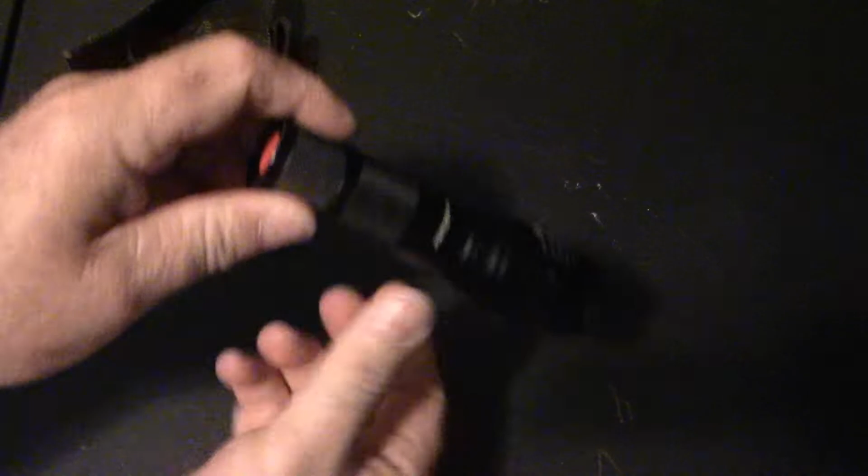Welcome back, everybody. This is part 2 of the practical 3D design using FreeCAD. As you remember last time, I did a quick video for this flashlight, and all we did was create a jacket or shell for the 18650 cell so that it would fit in this flashlight and not rattle around.

So what we're going to continue to do today is design a case that we can recharge those 18650 cells in. As I mentioned in the first video, I can get these rechargeable batteries from the dollar store. As you can see here, they are $4, 1800 milliamp hours, and that's what we use to get our 18650 cells from.

And what we're going to end up doing is building something like this. This is just a first revision with some errors, so we're going to start from scratch and basically redesign this. The idea is that we can open it up and put an 18650 cell in there to recharge, and we're going to use the electronics and everything from this cell.

So first what I'm going to do is go over to my desktop and we will start up our FreeCAD so that we have a place to put in our numbers and things, and at the same time we're going to open this up.

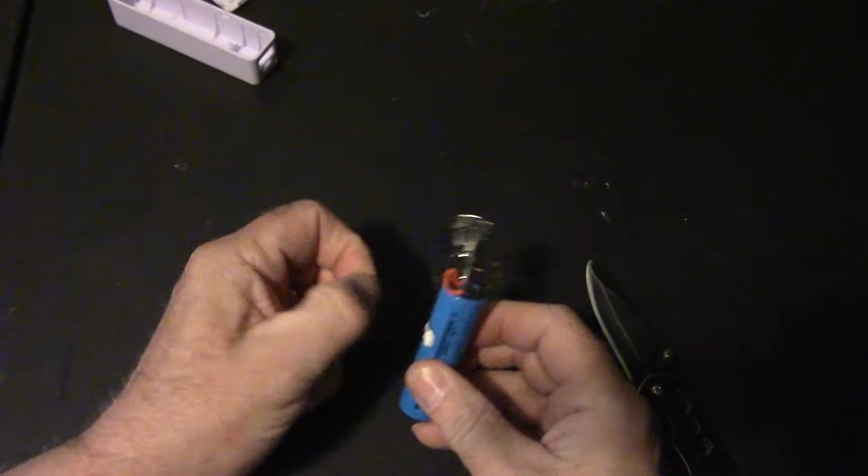And we don't need these pieces anymore. So there is our 18650 cell. Take that goop off, that's just going to interfere with us later. Careful not to breach the cell.

Alright, so we have an 18650 cell, some wires. You can see it's got a tab soldered on each end, one there and one there for the wires to go on, and this little charging board.

So what we want to do is basically take this charging board and add it into a spot like that at the top. And then we need to have some way of contacting the ends of the cell. So what I'm thinking of is probably a folded piece of metal.

Here's a concept of a folded piece of metal, and that will fit down in this slot here and reach out here. And also one will be in here and reach out, so that when I put the cell in, they will contact the ends.

And then we'll design it so that you can close this up. The cell will be secure inside, and you can plug it into a charger. Basically, it'll be the same thing as this power bank, except that we can take the cell in and out.

And if you look at the sizes here, you can see that our case is only longer than this by the ends where we're going to put our pieces of metal for recharging. Other dimensions are pretty much the same, except for the hinge that's going to stick out here.

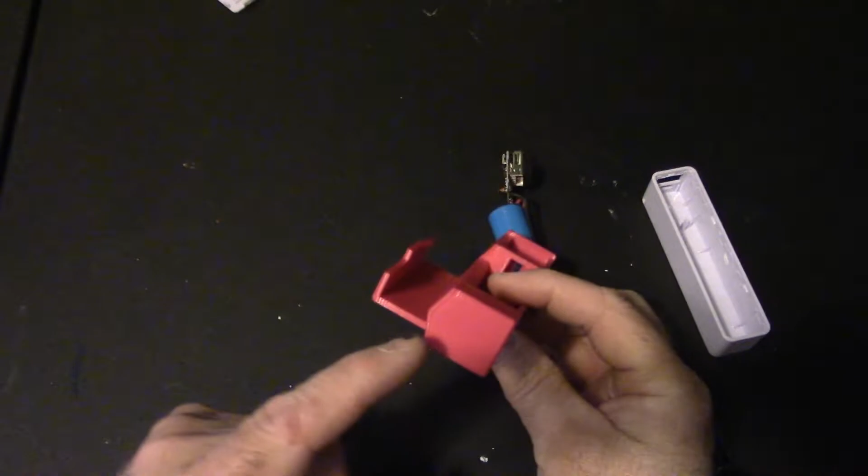Okay, so a little word about hinges. In order to have a hinge that opens up all the way, your axis of rotation of the hinge has to be outside of the edge of the box. So for it to come out here, to the edge of where our box is, you have to have the hinge rotation outside of the box. Otherwise, it'll bind up on its own self and only open up 90 degrees.

Now we could build it to open up 90 degrees like that, but I thought it might be a little harder to get cells in and out, so we're going to design it to open up 180 degrees. You may also notice that this hinge is very tight, with no seams. This is very thick and robust, so you're not going to be able to put this together and print it in two pieces. This is actually designed to print in place. You can see there that it was printed open, and there was just a little bit of touching there.

Print in place like that, and then open it up, and it works. So this is going to be a print in place moving hinge designed to fit the 18650 cell and that circuit board plus the two pieces of metal we need.

Let's go over to FreeCAD, and we'll see here we have it open. We're going to go down first to the spreadsheet and create a new spreadsheet. Oh wait, we need to create a new document first. There's our new document. Now we can create our spreadsheet, and then we're going to go down to part design because that's where we're going to work later. Okay, so we're going to leave that like that.

We're going to go into the spreadsheet. So, like we said before, the two default values that I use all the time are based on my printer and the materials that I use and how I print things. One is what I call material thickness. This is a wall thickness, or the thickness of plastic, which I've used here. You can see here, that's this thickness here, which is very robust.

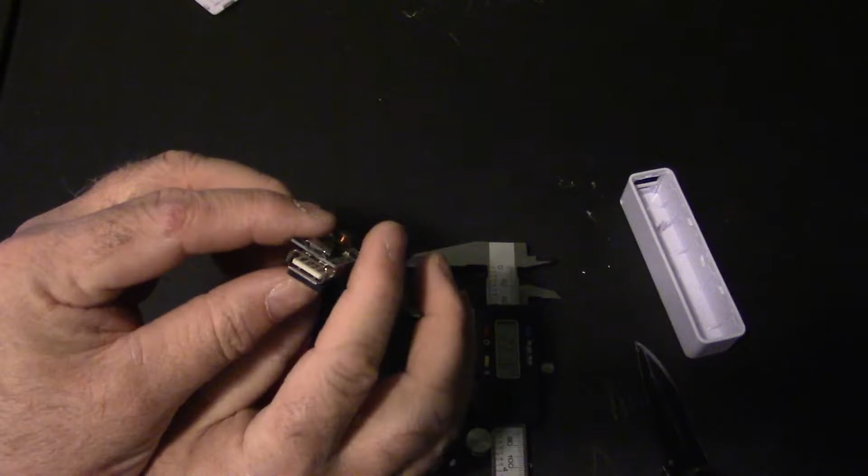That's the board length. Alright, so the only other things we need to think about now is how we're going to put power into this cell. There are two things, right? We don't really care about getting power out, so we do need to leave space for that. But we need to get power in.

Now, if we put our plastic right up to the end here, and just make a hole big enough for just the end of the cable, it's never going to connect, because we're going to have it sitting back this way, 2.4 millimeters. So what we need to do is make sure we have a big enough opening here. I'm not really caring about waterproofing or anything else, so I'm actually going to make the hole a lot bigger than we need.

So right now, on this side, it's about 4 millimeters high, and it's 7.5 wide. But I also need one for the USB-A. And look at that one, it's 13.25, so I say call it 14. So we make an opening that's 14 wide all the way down. That should work. So we'll go back to FreeCAD.

USB width 14 millimeters, and then we need the height. Now you notice that the board has one above and one below, and when we design our charger, you can see here it's designed to kind of sit in the middle. So if we make ours sit in the middle, so the board height is there, that should give us enough room for the top part.

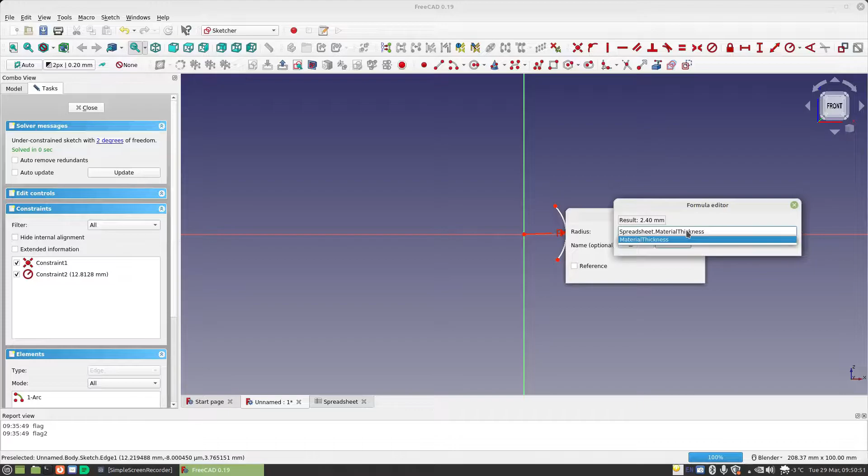Okay, so this is now the edge of our hinge. Okay, now we need a line going up to the top of the box and a line going down to the bottom of the box. And then we need some nice rounded corners. Now we could use fillets later, but fillets sometimes add extra troubles. So we're just going to use another arc, one here and one here. And those are our nice rounded corners.

And we need a top of the box and a bottom of the box. Oh, and you can see that these 2 did not meet up, so we're going to make sure that we connect that. Again, we're going to do our own manual filleting. One here, and then a line to connect them. There we go. So there's the basic outline of our box.

But now we need to do some figuring of what we need for heights and things. So this one, and this one, and this one, and this one. These 4 corners, we're going to make them all the same with the equals up here. And now the radius of them, because we're using a material thickness, we're going to actually want to radius it to the same thing. So we'll pick this one up here, and we're going to set its radius to the material thickness again. Okay, now if we change our material thickness, all of our corners will look nice still.

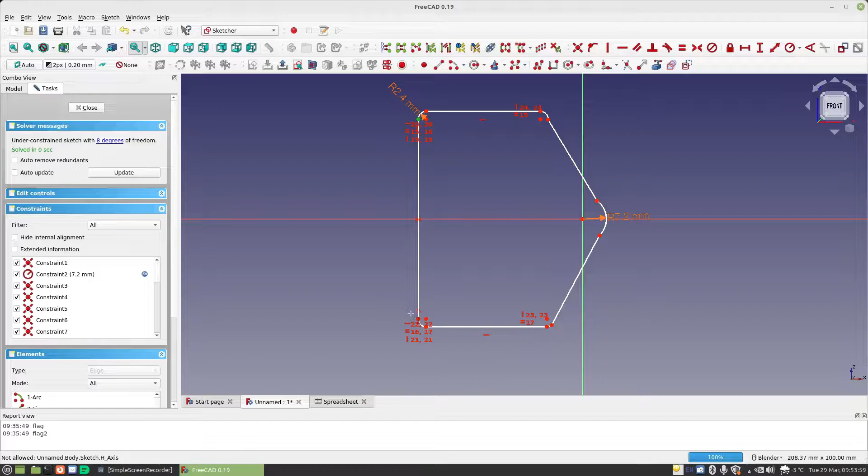In order to fit the 18650 cell in this box, the space between the outer walls has to be the diameter of the cell. So we'll go in here and set this to Spreadsheet, cell diameter. Alright, so now an 18650 cell will fit in here, and then, because the radius is material thickness, we have material thickness up here and material thickness down here. So that fits our cell inside there. We're going to do the same thing down here. We're going to grab that point and this point, and we'll set it the same.

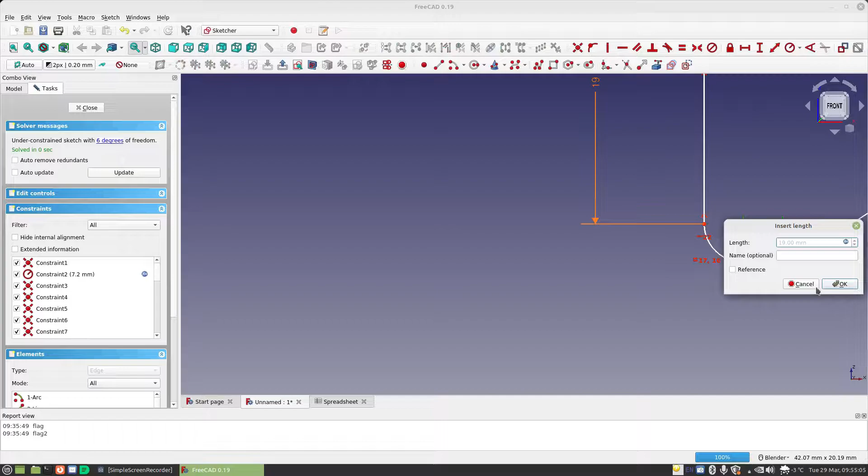Alright, so now we have our 18650 cell. It should fit in there. Oh, you know what? I made that material thickness without thinking. We have to make this the cell diameter. There we go. Now you can see that this has moved all over the place crazily. That's fine. And these here did not move together, so let's take this one and make them the same. Alright, so now we have our main box here. We don't have our hinge and we don't have an offset.

Let's make these look a little nicer. If I take this line and this line and use this constraint here, the tangent, we'll get a little constraint substitution, and now you'll see that this, when it comes along, echoes this curve. So this is a tangent now to this circle. We're going to do the same with this one. Make it tangent, and we'll do the same here. Make this one and this one tangent, and this one and this one tangent. Okay, so now we have a nice hinge design, and they move the way we want them to.

But remember we said we need our hinge axis point to be outside of our box. So the only way we can do that is by setting the distance from this inside point, because these points here can move, from this inside point to the hinge point has to be the same as the material thickness. So I set this and this to Spreadsheet material thickness.

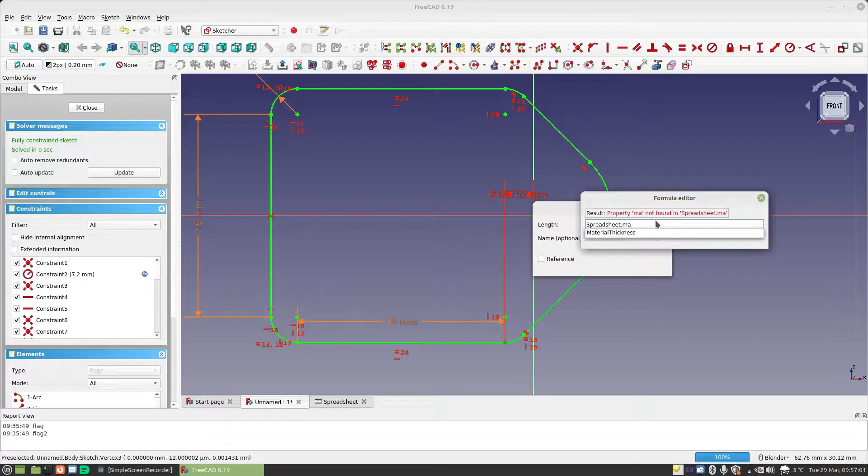There we go. Now our hinge center is just outside the wall. It's actually touching it right on the edge, which is like perfection for how it's going to work. We'll have to take care of making sure that we don't have any interference by using our standard gap with the lid. But you'll see why I put it this way shortly.

Okay, I think I did this wrong here. I think this should actually be diameter. Yeah, let's change this. Let's make this the diameter, because that looks really large. Spreadsheet dot material thickness times 3. Yeah, that looks much better. That looks closer to what we have here in this design. Because we had 14 millimeters, and that didn't look right for that size. This here looks closer. Yeah. Much better.

Alright, so there's our fully constrained sketch. So how are we going to make it long enough to fit everything we need? So we're going to use the pad. We're going to change it to 2 dimensions. And the reason we're doing 2 dimensions is because the 18650 cell here, you see, is not centered. But our second drawing, we want to be able to easily center this in here so that they line up. So in order to get the right dimensions, we're going to start from the center here, and one dimension is going to be this way, so you're going to have half the cell length plus the material thickness plus a gap area here plus the material thickness again.

Alright, now we can go back into our drawing and into our pad. So one dimension is going to be our cell length divided by 2 plus our tab length. So that gives us half the cell in the inside space, and then we need the material thickness times 2. So that gives us the one side.

Now on the other side, we want the cell length divided by 2 plus the tab length plus the board length. So we have the board length, the tab length, and half the cell, but we have 1, 2, 3 of the material distance. So we're going to use spreadsheet material thickness times 3. And there is our basic cell case.

Alright, so now we have a solid object that will not fit anything in it. It's just a solid tube of plastic. So now we need to add in openings for the different things, for the cell and everything else. So we can go over here to the left side and create a new sketch. Okay, and I don't know why FreeCAD does this. Rotates things, just does it. I don't understand why. But because it has done it, we're going to work with that.

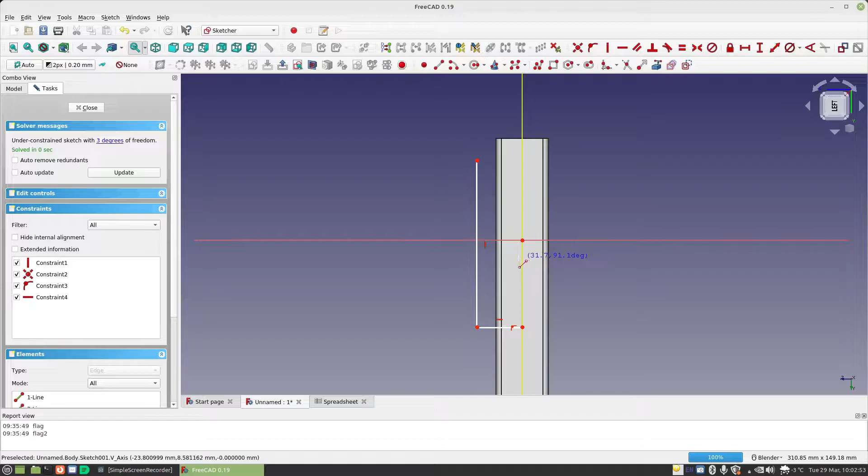This is going to be a problem. See, if I make these horizontal, then FreeCAD has a problem with redundant constraints. So some of these we're going to make a little crooked, and that's okay. Alright, so now I can take this and that and say a touch. Take this and that and say a touch. And make this one horizontal.

And this one is not vertical, but at the same time we also want it centered. So because it's not vertical, we're not going to have any problems. We can click there, and center it. Then if I make these equal, then this becomes centered.

Okay, so now we have 3 degrees of freedom. So for this hole here, that's so we can reach down around the cell. Right now the box is set up so that the cell is centered in it, and you can't reach and put your finger underneath of it. So we're going to make the height of this thumb hole, so we can reach under the cell, 1/4 of the cell diameter. So if we go spreadsheet.cell diameter /4, that'll give us a hole that's big enough this way.

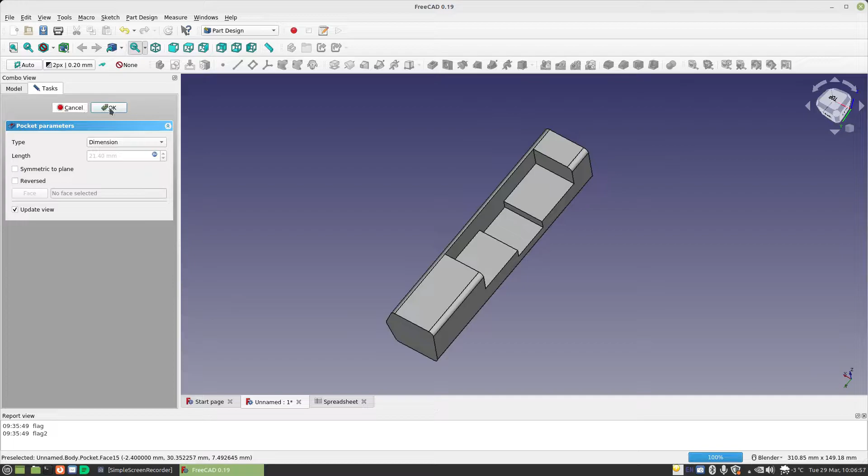Actually, you know what? Let's redo that. Let's go back into our sketch, and we're going to delete these. And we're going to delete that constraint, and we're going to take this guy and this guy and make them the same. And we'll take that horizontal constraint off, and we'll say this one, this one, this one, and center. There. That works better. Alright, so now we've got our sketch there for the cell opening. We'll make a pocket, and we'll make it through all. Okay, so there is our opening for the cell that way.

Now we need a spot to put the circuit board in. We also want to be able to put a cover on it. So one of the things that I like to do for putting covers in is make a dovetail joint. So we're going to put a sketch here. And we'll just draw this in quickly. So just to show you what I mean, a dovetail joint is like that. Okay? So that way if I cut a hole like that in here, then I can make a cover of this shape and slide it in.

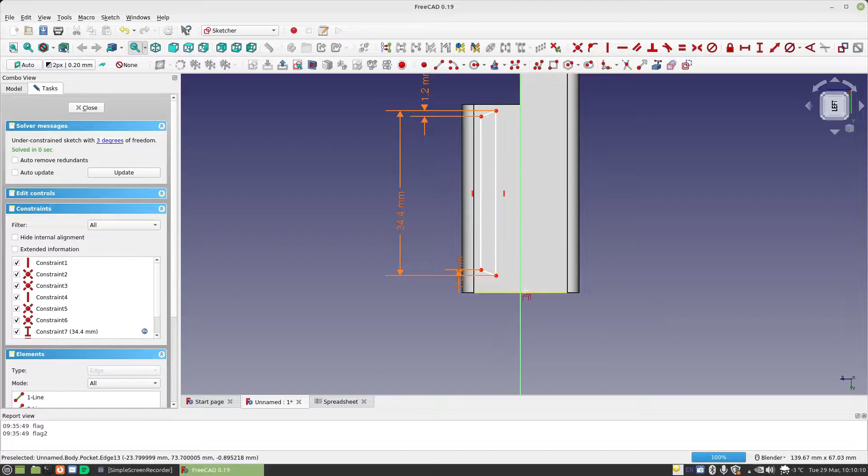Okay, so now where do we need that to go? We need it to be lined up with this edge here and also be centered in here. So the way we do that is we grab this one right here. This is our reference. We're going to reference this outside edge. And if I say that this piece, I better be careful. Before I do that, we better set a thickness here. Otherwise we're going to cause ourselves some trouble. So this, between these 2 points, is the material thickness.

Alright, there. Now when we move this around, see, if I hadn't set this distance, this piece could move past this one, but now if this piece moves, they all move together. Alright, so now we're going to say that this point and this point have a vertical constraint, so that puts us the right distance up this way.

And now we need this to be a certain distance here, and that's going to be a material thickness again. You can see how we keep using material thickness as a reference, and that's why we set it, so that we can continue to work with it all the time, and then if we change our material thickness for a different printer or something, it will update all through the whole drawing. See, now we have a fully constrained sketch, and we're going to put this one also through all. Alright, so there are our 2 top openings.

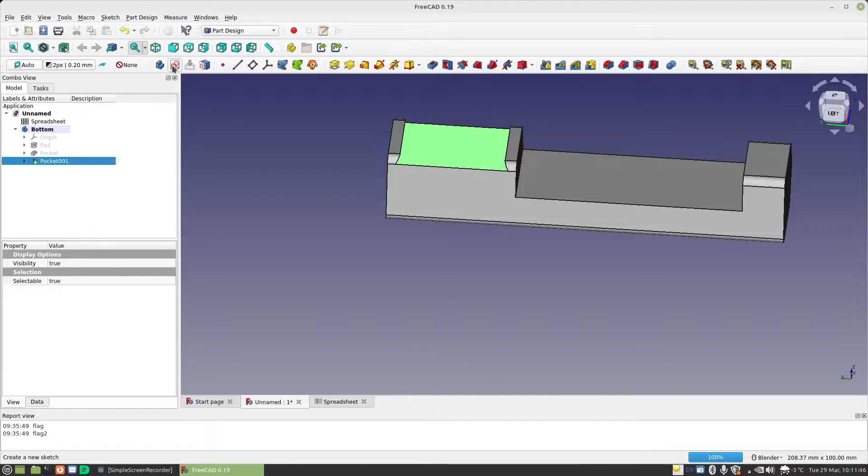Alright, so next what we need to do is make an opening here for the board, and an opening here for the tab. So we select the top, and we create a sketch. So we just need a box here, and a box here. Alright, so first thing we're going to do is say that these 2 here have a vertical constraint, that way they're at the same spot. And if we say that these 2 here are the same, then they line up over here.

This one is going to be a board length. Okay. And then we need the material thickness space between these 2. And we'll put that measure on this side just for the fun of it. And then this one is going to be a tab length.

Okay, so now we have 3 degrees of freedom. Why do we have 3 degrees of freedom? Well, we can move this in and out, and then we can place this in any place we want. Alright, so the width is obviously going to be the cell again. Alright, so now all we have to do is place this somewhere in our drawing.

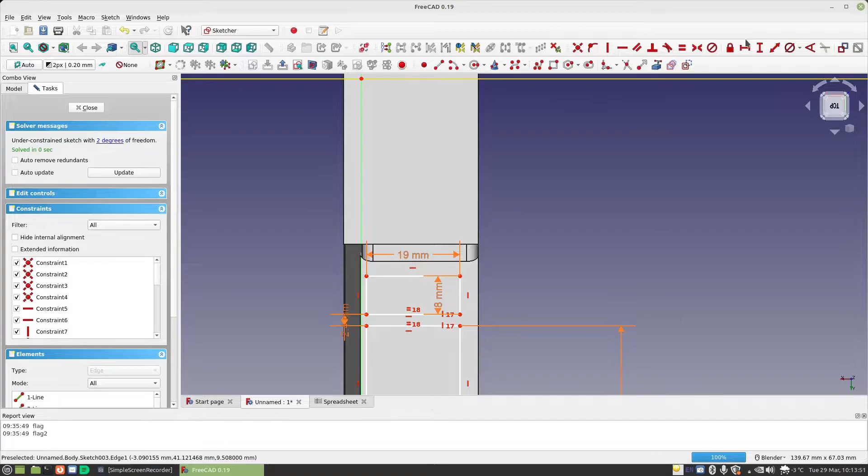Okay. So rather than using a reference point, what we're going to do is use the center axis again. And the way we set this up was that this is the outside edge, so then there's a material thickness, the opening, and then material thickness. So if we set the horizontal distance between there and there to a material thickness, now it's centered. Now all we need to do is put this in the right spot vertically.

And remember we made a dovetail, so if we use this, our opening wouldn't be in the right spot. Matter of fact, if I move up, you'll see that it's outside. We actually are going to end up with it here in between, because it's going to be centered underneath. I'm going to bring it up so we can see this point. And the distance between here and here is going to be the cell length divided by 2 plus material thickness. And there we go. Centered where it needs to be.

Okay, fully constrained. Now, if we make a pocket and we set that to the cell diameter, you can see it goes in, but it's left us a wall on the bottom of a material thickness. Okay?

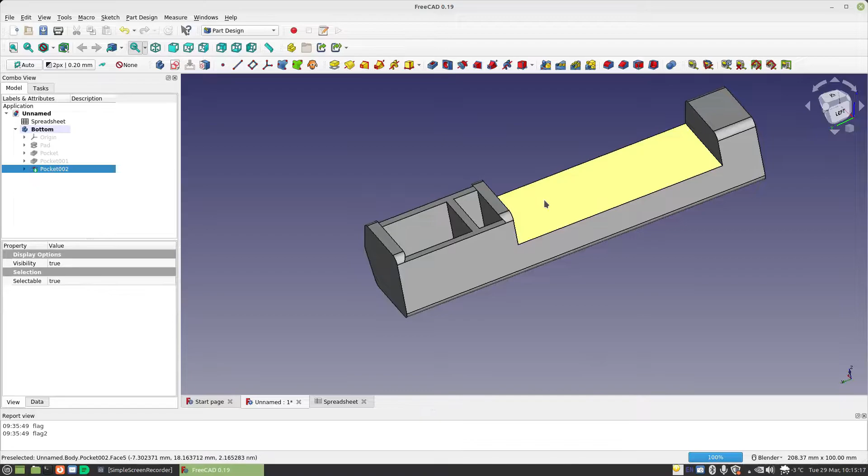So the next thing we need to do is make a space here for our cell to fit into. That one should be pretty easy. We'll create a new sketch. We just need a box. And we're going to take off that constraint because it will interfere with this next one. So like I said before, we have this centered, so we'll just center that and say that this is the cell length. Nicely fits up.

Okay, and then this is obviously the cell diameter. And now we need the spacing here, and like I said before, here's our material thickness. So now we're going to make a pocket. Now because this is only half the size, this is the cell diameter divided by 2. Alright, there's a nice little hole in there.

Okay, so the only things we have left now is we need to make it so that the hinge fits in here, and we need our holes for our hinges. So if you look at the example I made, you can see that I have a hole here for the tab to fit in, but also a hole down here for the wire, and I have the same thing here. And basically all I did is create a sketch on this face and push it through both ways. So that's what we're going to do again.

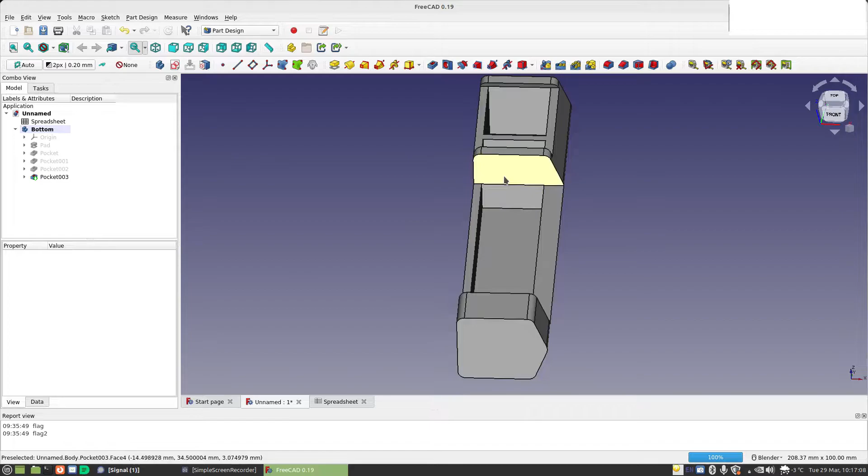So we'll come over to this face here and we'll create a sketch. And you notice we cannot see because it's behind this. So I can just rotate this up. So we made a line. I'm actually allowing FreeCAD to create the horizontal constraints for me.

There. Alright, so we didn't get some of our constraints. Let's make this vertical and make this horizontal. Alright, so just for fun, because we already have a tab length, we're just going to make this the same. Spreadsheet dot tab length is also going to be our width. Okay, so that gives us an 8mm hole to put our tab in.

And let's make this wire hole here. We'll make it a material thickness, because that's a fairly large section. And let's take this one and this one and make them the same. So now we have a box sticking out the side. That is a square box here. That's a material thickness. Alright, so we have 3 degrees of freedom. 2 of those degrees are where we place this. The other one is the height. And because we're putting it in the box, we're going to make it the cell diameter again.

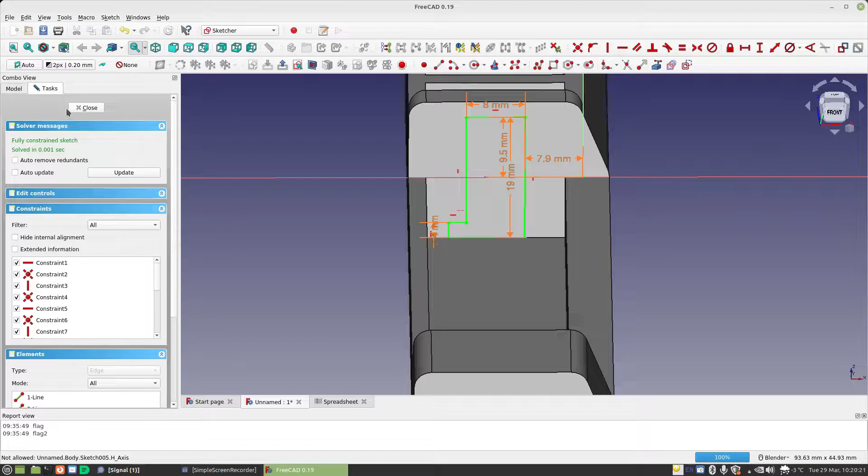So if we look at that, now you see that this looks centered, and it should be. So the only degree of freedom now is centering this way. And because this is a cell diameter and height, and we have this centered on that, if we make this distance here the cell diameter divided by 2, that just touches the bottom, and there's our 2.4 material thickness on top. So there's our fully constrained piece. And we hit close.

Alright, so now we need to make a hole. So we make a pocket. We're going to go 2 dimensions. So this first one here only has to go through that wall, so it only needs to be the material thickness. Okay, so that's this side. Now you notice this one goes right through. So in order to get from this face to that face, we need the cell length. To go from that face through that first wall, we need the material thickness. And then to go from that wall through where we're going to put the tab, we need the tab length. We hit OK, and now you can't see it, but if you look in here, you can see we have a nice space. Alright, there's all of those pieces.

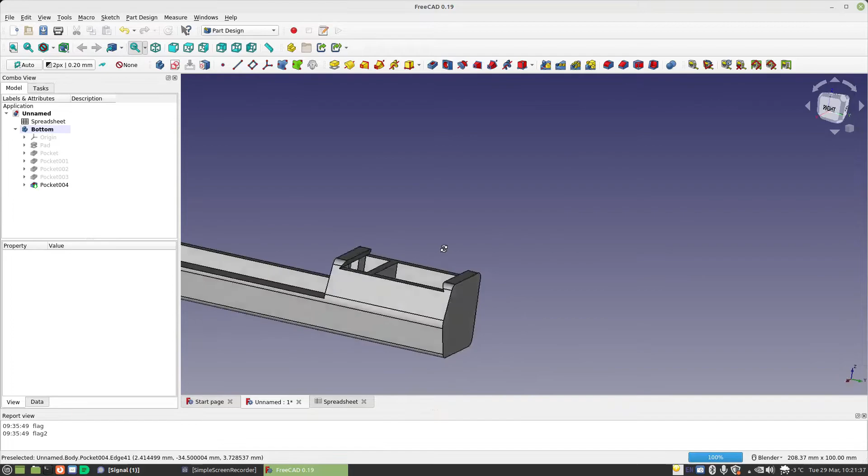So the only piece left to do now is to make a space for our hinge here. Now this one gets a little tricky. Okay? So let's flip this around so we're looking at the front. In order to get this to work, instead of drawing on a face, we're going to create a new sketch, and we're going to use the XZ plane. And hit OK. What I'm going to do is close this, and hide this. We're going to go into our sketch. So we had it curved this way, so we need an opening going this way for where the other box is going to be.

So we'll start with our arc like we did last time. And there's going to be a line going down like that, and our little curve at the bottom. And then, because we're just cutting a hole, we're going to make a line up like that. So this to there is vertical. And this is going to represent our outside edge. So first, the diameter of this that we set last time is the material thickness times 3, which is very small compared to what we were doing. And then we set the radius down here to the material thickness. Right.

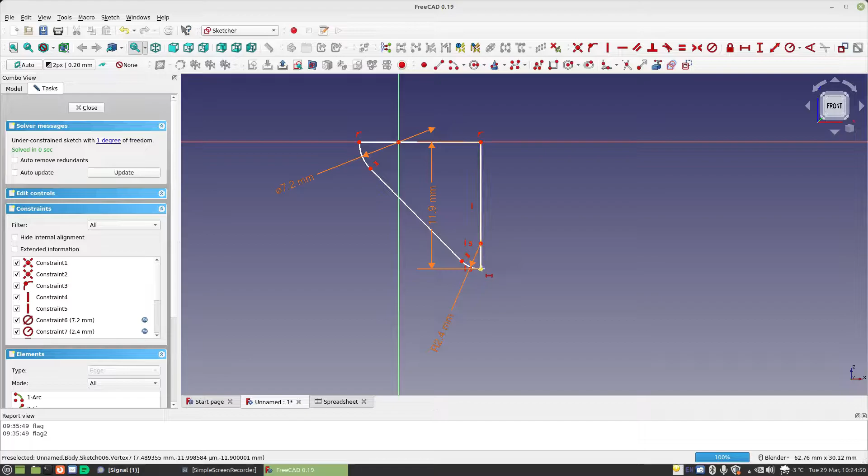Okay, so we only have 1 degree of freedom, which is this distance here. So from the center of the hinge to that point is a material thickness.

Like that. So this cutout should give us a cutout for the other hinge, the other door. There's a problem though. We don't have any gap in this. So what will happen is that when we print this, they will stick together. So in order to get the gap, first thing we need to do is we need to change this. This diameter, we have to add the gap to it.

Like that. So that makes that slightly larger, which also means we need to move this a little smaller this way. Okay, so we're going to subtract the standard gap this way. And now we have a slightly bigger opening here that we're going to make.

So we'll go back in and we will show this. You can see that this is going to cut out in here. Okay, now I do see a problem here. Why is my circle in here? My circle is in here because I did the wrong math here. That's the problem.

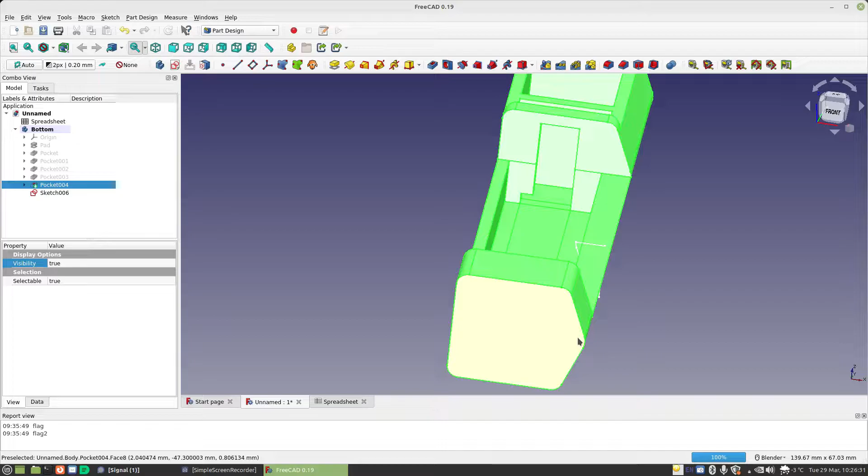So we're going to have to fix that math. Because this circle edge should be touching here. Otherwise we end up with our other hinge coming into our space. Okay, so we're going to leave that and go all the way back to our original sketch. You can see here that this spacing here is only 2.4, but this diameter is 7.2. Half of 7.2 is 3.6.

So this should be at least 3.6 away, and it's not. Okay, so we need to move that away. So let's go back in here and we do spreadsheet dot material thickness times 1.5. There, that gives us a bigger thing, and you'll see here that this now is outside. Okay?

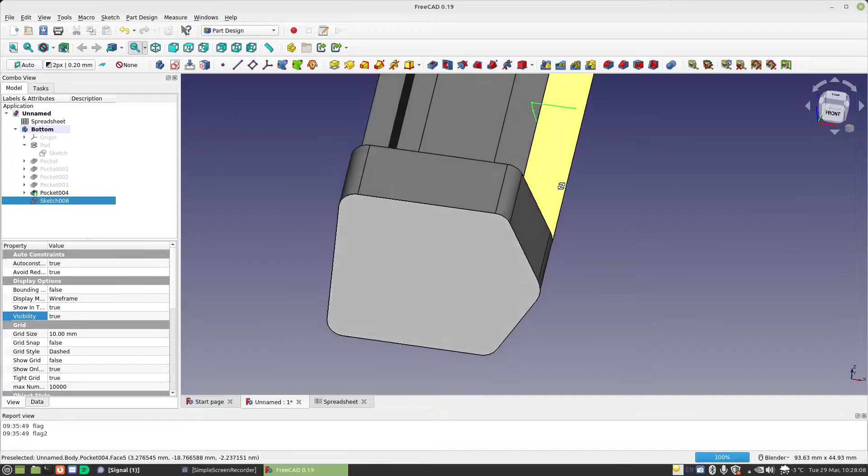Close, and all of these should get changed now. We'll just go down through, make sure they recalculate. Now if we look here, you see this is too big now, right? This is wider than our 2.4. So this one we did right. So this sketch here, no, that one's fine.

Okay, so this ends up being too big, right? Because we only made this 2.4 from the center. This has to be times 1.5. And that moves it over here. That's better. And we'll go into this one and do the same thing.

Same thing here. There. And everything nicely lines up. So now you can see that this is just inside there. We have a little bit more space. That's our gap. And we need to cut that space out.

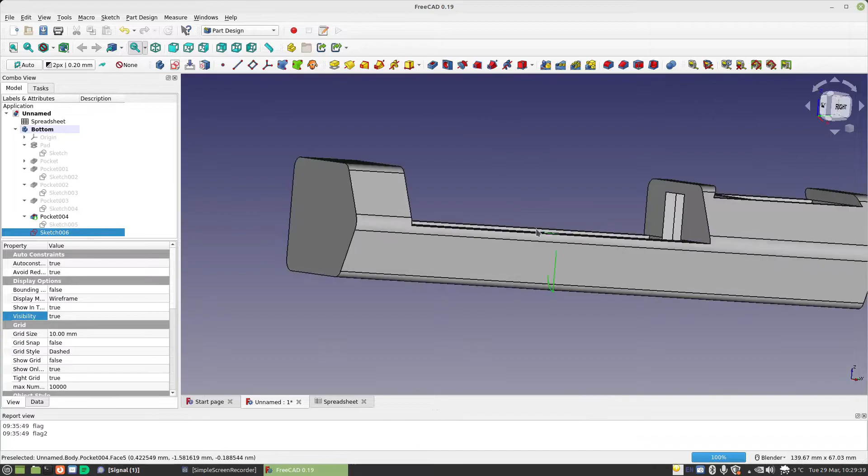So again, we're going to use 2 dimensions, and this is going to be the cell length divided by 2. Takes us right to the edge. And you can see that I have neglected to put it wide enough here, so we'll fix that. And we go here to cell length divided by 2. Okay, so we obviously need this a little wider so we have more space.

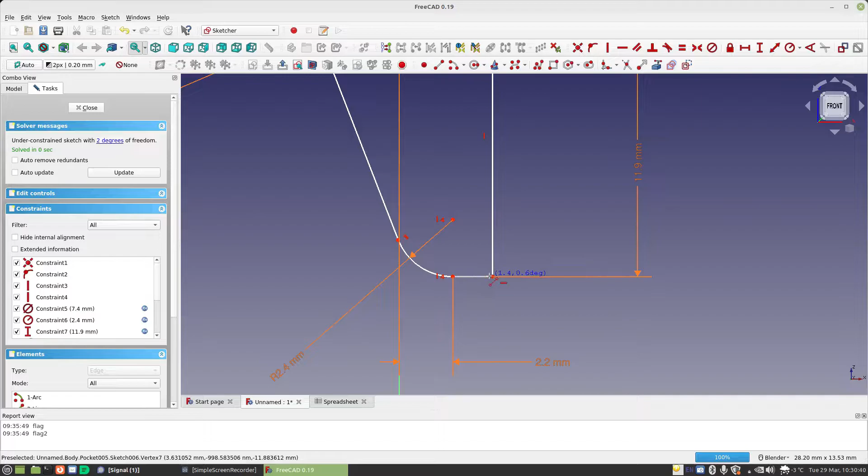Okay, so we'll go back into our sketch. And we're going to go to this point here and hit delete, and that will delete the constraint. Now I can move this away. Right, and what we're going to do is add a line between these two, and we should make that line to be material thickness. There. So you can see we made it wider, make it close, and there we go. We have a nice spot there for our hinge cover to go in.

Alright, not quite done yet. We need an opening here for our hinge to fit in. Alright, so we're going to create a sketch on this face. And we'll move it down so you can see, and you notice our nice little point there. Now we don't have to do any measuring from curves or anything because we got a nice point.

And we need an opening. And its radius, its diameter, sorry, is the material thickness times 2. Alright, so there we have a nice round opening. Because that's its diameter, close, and we're going to give it a depth of also the same thing.

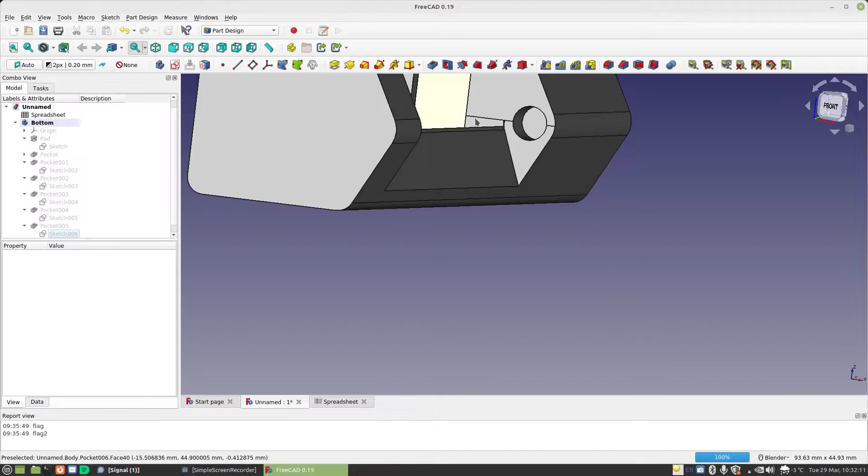And the reason we do that is because that is basically the square equivalent of a square hole, but because we did it here, I can fillet this. And if I add a fillet, you can see it starts to round out. We can do this at a material thickness, but because of the way FreeCAD works, this will not render as a fillet because they're exact. There's something to do with the way FreeCAD does math.

But if I do a subtract of 0.001 millimeters, it still shows up here, and it will actually show the fillet. And obviously I did that wrong. This depth has to be half that. This should only be a material thickness deep because we want it half of a circle.

There, now you can see that that is half of a hole. And when we make our other one, we will add it in there.

Now, again, because this is the opening, we should make it a little bit bigger so that it fits the socket. So we come in here and add plus the standard gap, and that will make it a slightly bigger hole. You can see that has left a little space there, so we can actually add that in here as well.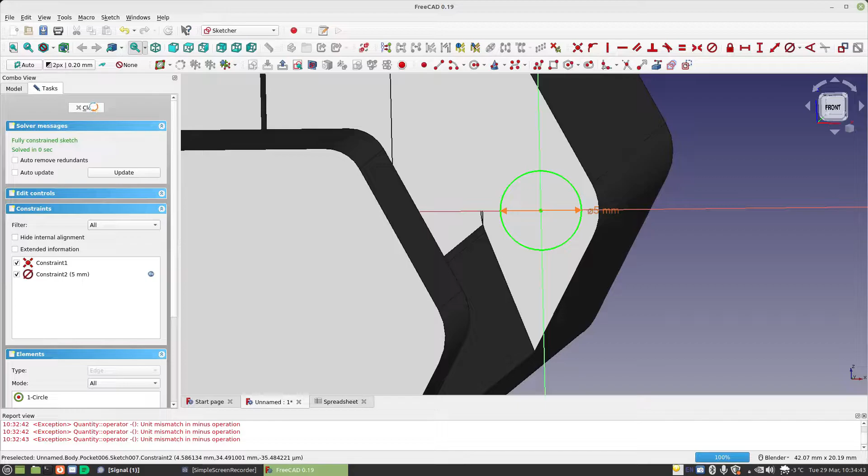Enough. Now we should be able to do the fillet.

Should have made this, because the way we're doing this, this should be standard gap times 2. There we go. Now we should be able to do that fillet properly. There we go, nice semicircular hole.

Alright, and we're going to do the same on this side. So select the face, create a sketch. Does it upside down, that's fine. And we'll remember what we learned on the last one: spreadsheet dot material thickness times 2 plus spreadsheet dot standard gap times 2.

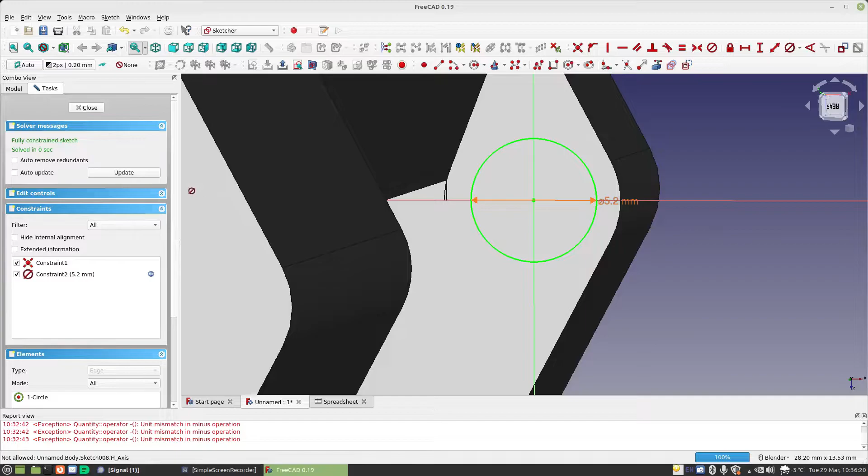Okay, okay, close, make it a pocket. Set the pocket depth to material thickness plus the standard gap. Right?

And we'll fillet that as well. What I should have done was do the other fillet first, but oh well. Material thickness plus standard gap minus 0.001 millimeters. There we go, there we go. There is our base case.

Should fit our cell nicely. And that's the first half done.

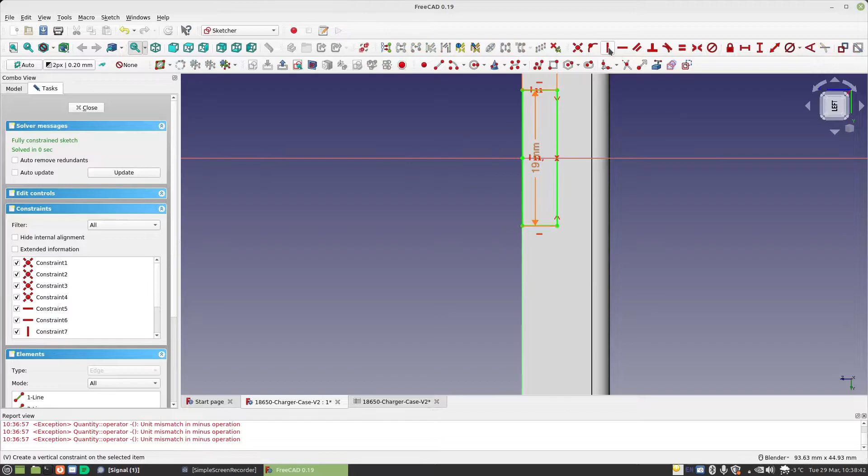So let's create a sketch, we'll create a nice little block. We're going to make the width of this hole the cell diameter divided by 4, and we're going to make the height of this the cell diameter, and we're going to take off this horizontal constraint and center this, and then we're going to set a vertical constraint here to there, and there we go. We'll hit close, make a hole, done.

Alright, there is our case. Save it again. Alright, so that's the bottom. Now we need a top.

So we're going to create a new body, rename it to top, and we need a sketch. And we should turn it the right way, and put it there on that plane. Now it gets really hard to draw because you have this in the way, so we'll close that for now. We're going to go to the bottom and change the visibility to false.

Now we can go into our drawing. Alright, so you remember when we drew that, we drew it over on this side, so now we draw the cover on this side. And this is the center of our hinge, so we need our curve, our line, our ghetto fillet.

Line, another rounded edge, and because this is the box... ooh, that's not good. Let's get rid of these. Get rid of that. Go down here, get rid of this line we drew. There.

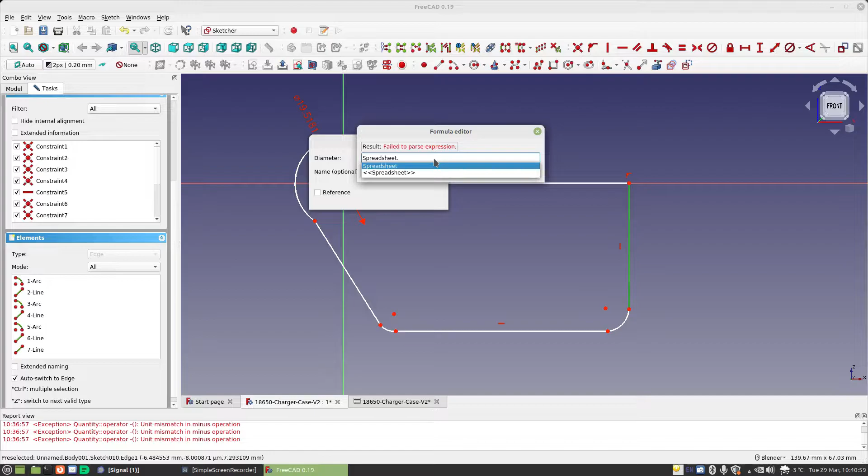Was the material thickness times 3. Okay, and we made these to be tangent. We made these to be tangent. And we made these to be equal. And we made the radius of these to be the material thickness. So, and then this and this have a vertical constraint. This and this is a vertical constraint. This and this is a horizontal constraint. This distance here is half the cell diameter. And then this distance here is the cell diameter.

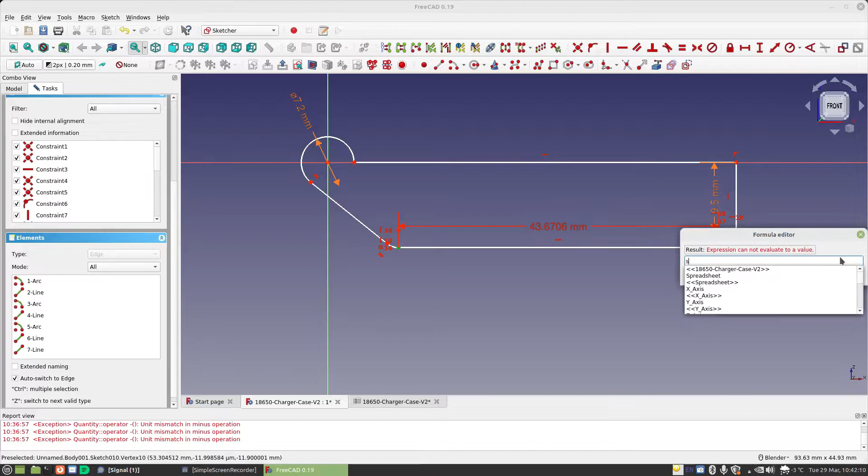And then we had this gap to be 3.6, which is half of that, but also we could do the same thing by just selecting this point and this point and giving it a vertical constraint. And then we have a fully constrained diagram. Go back here and hit close.

Alright, so there is our cover. I haven't hollowed it out yet, but just for fun, let's bring this back and take a look what we have. See how they fit together? But if I zoom in, you can see there's a small gap there. If we look underneath, you can see there's a gap. Looking in here, there's a gap. You can just see.

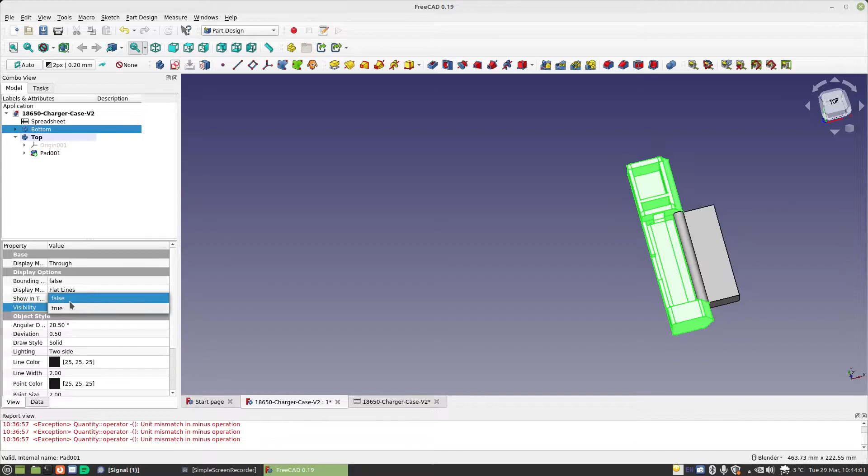Okay, so we have a gap placed all the way around. And we'll hide that again, because we need to make a hole in the middle here. So we have a sketch. I'm just going to do a quick box.

Take out that horizontal constraint. Center this here. This is going to be cell width or cell diameter. This is going to be cell length. So we only, yeah, that's right.

So now we only have one constraint problem, and that's this. And so we can set that. Just very carefully grab that and that. And this was the material thickness times 1.5. There we go. Close. Make a pocket. We call this the cell diameter slash 2. We have a nice cover like that.

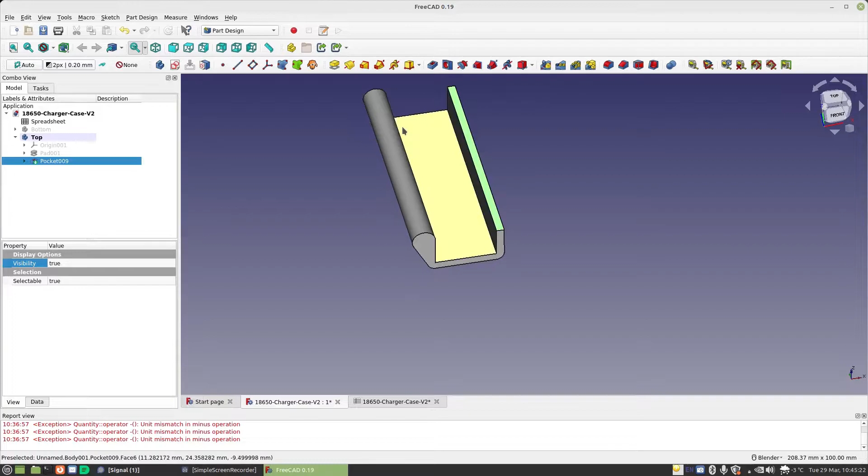Now we need our little closer for the thumb hole. Sketch. Nice little box. And a box width is a material thickness. So. We're going to center this. And now the height of this,

we did before, was the cell diameter, but now we have to subtract the standard gap, so it's not too wide. And then we want to set our horizontal distance from there to there is the cell diameter plus material thickness times 1.5. And that's centered nicely. Okay, there it is there.

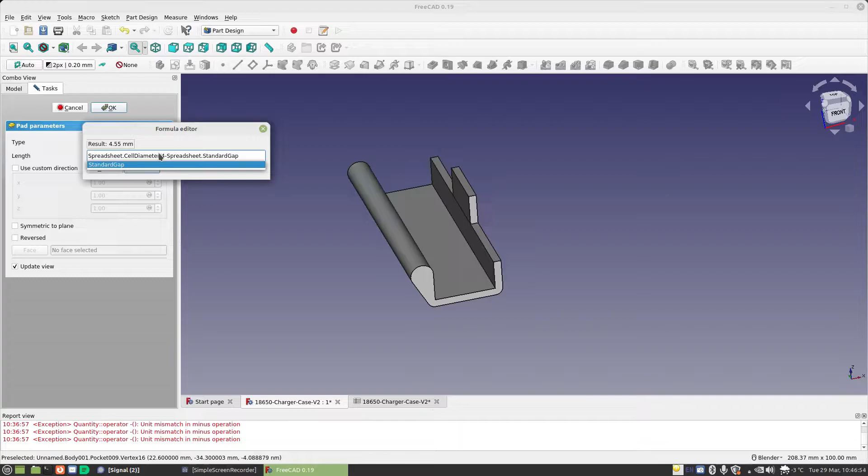Now we're going to pad it. Now its height was the cell diameter slash 4, but also minus a standard gap, so otherwise it won't fit in. There we go. So all we have to do now is put our two pins on.

So we'll start here. Create a sketch. Hinge pin is just a circle. And its diameter was 2 times the material thickness, like that. We're going to save ourselves some time.

We'll do a pad. That's two dimensions. This first one is material thickness. That one's right. This one here is going to be material thickness plus the cell length minus the standard gap.

Because we made this smaller by a standard gap. Alright, so now we should be able to fillet this to material thickness minus 0.001 millimeters. And we should be able to add the other circle. There. Now we have two hinge pins.

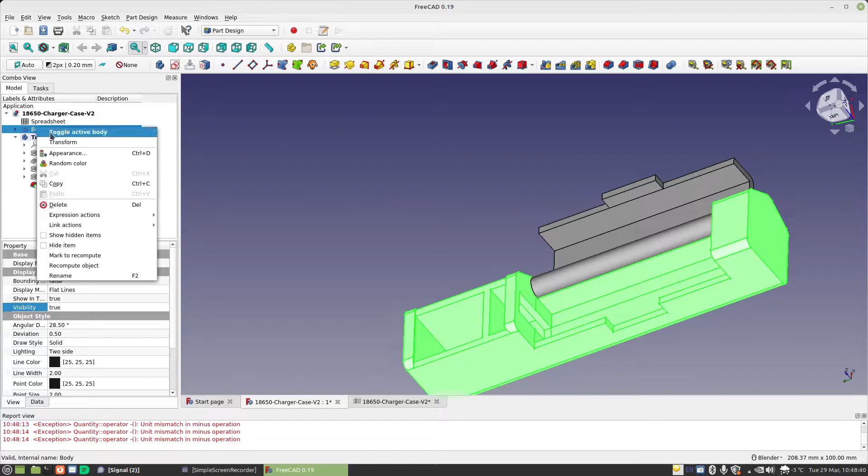And so now we can bring this back. There we go. The only thing I forgot to do, so let's toggle the active body. I forgot to do a nice fillet on the outside edges, so let's fillet this to the material thickness minus 0.001 millimeters. Nice and round, and we'll do one over here. So we'll add that one. There we go. Nice and smooth and round. Pieces in place.

So we'll print that and then we'll show you what it looks like. Oh wait, I should show you how to export that. We have these two pieces. You have to select both of them. That one, control that one. Now they're both selected. File, export. It's going to export as an STL.

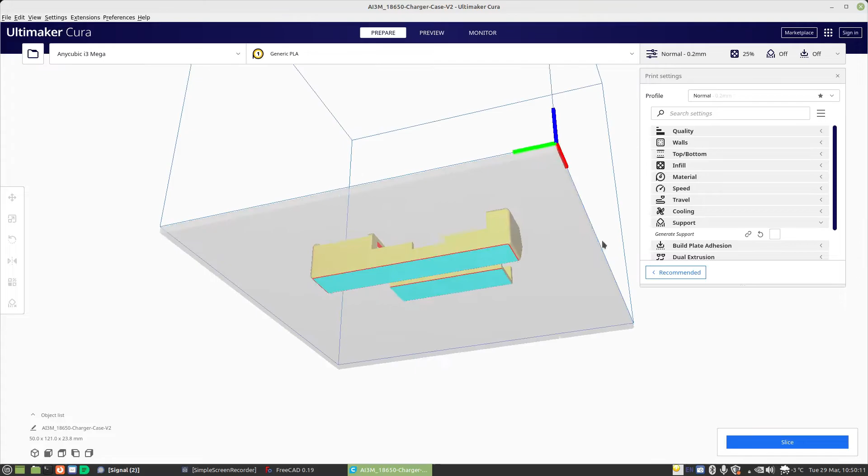Let's bring up our Cura for my printer. Open up our file. Version 2. So there's our shape we just made. Now I have my printer set up with no supports, so it shouldn't have any supports. Right here, no supports generated. We'll slice and print it. Three hours and 18 minutes. Well, I'll see you in a bit.

Well, welcome back. I printed off our first edition of what we had designed, and you may notice that there's a couple errors. For instance, I forgot to put the hole in the end for the USB charger. I also forgot to put a hole or a mount in the bottom to hold the circuit board up halfway from the bottom. I didn't put any hole in here for the wires to come from the charger into the

tabs. And then if you look closely here, you'll see that we don't have a space in this tab because these two are flush, and I don't know if you can see it on the video or not, but there's a little bit of a hold up here. So this cover is not quite coming down, and that's because we made this the exact same height as this. So they're half height, so I didn't put a space in there. What I should have done is made a space in here. As you can see, it opens quite well, closes quite well.

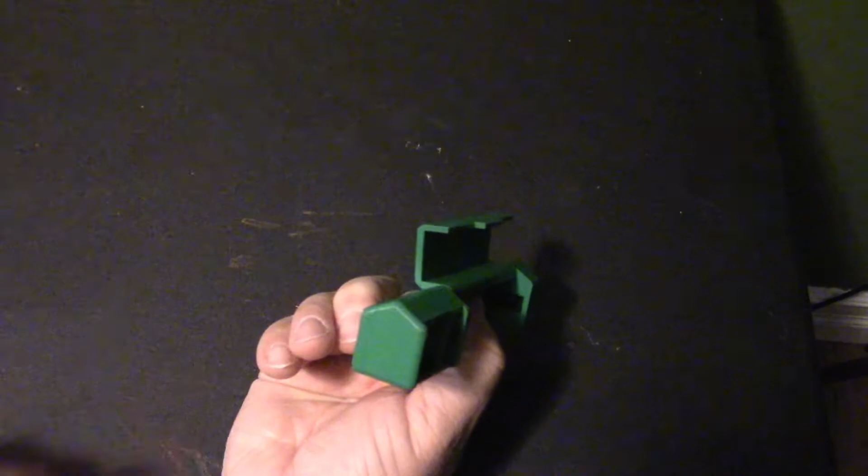So what we need to do now is lower this and this by a standard gap and bring this back up so that it matches up. Basically what we're doing is we're just lowering this side and this side. We'll do that in a sketch, and then we have to add a space here for the wires to come through for the two tabs, some support in here for the circuit board, and a hole in the end here for the USB. So let's get started.

We have our sketch open here, and I've hidden the bottom, and here is the top. Now this part I've already done. I went in earlier today just to see if I could do it easily, and I went back to our original sketch here, and you can see what I did is I unhooked this piece from this line. I undid that constraint, and I added the standard gap here, and then I reduced this height by a standard gap. So if I go in here and show you, I've subtracted a standard gap there. So that lowers this down, but keeps this bottom and this the height. So all we've done is lowered that.

And then in here, which is our top piece, I increase this height. So no longer does it have the standard gap. So because this is lower, this is also now lower by a standard gap. So we've just fixed that. So that's the easy part. There's our nice round ones.

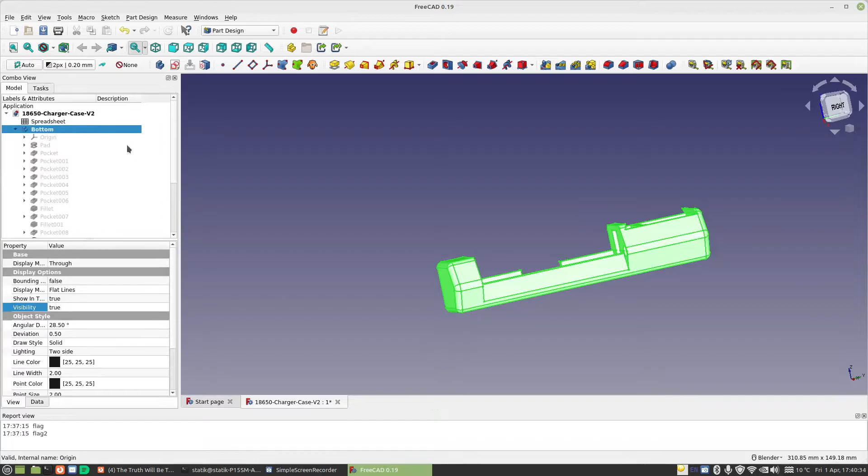So the rest of the corrections we have to do are back on the other model. So we'll go down here to View and set this to false, and go to here and set this to true, and we'll toggle the active body. So this one here is now the active body. So we need to do a couple of things. One of the things we need to do is add a hole in here for the wires to go through. So one easy way to do that is just to click on top, and we'll do a quick sketch on the top.

Right here. Just a simple box. And we'll grab that line as our reference point. And let's make it a material thickness. That's a pretty good number to use. So we'll go spreadsheet.material thickness. Okay, so that's the right width. And we'll set these two to equal.

Now, I haven't tried using the centering tool on this because the way it's designed is to center 2 points on a line. But there's an easy way to center this on this line. So the first thing we're going to do is make this and this a horizontal constraint so they're lined up, and you can see this is nicely the right width.

What I'm going to do is change to construction lines, and I'm going to do a line from this corner. We'll fix that in a second. From that corner to that corner. Let's make sure that these are connected. Like that. Now, to make this centered, if I just set these two here to be equal, that will automatically center it. There we go.

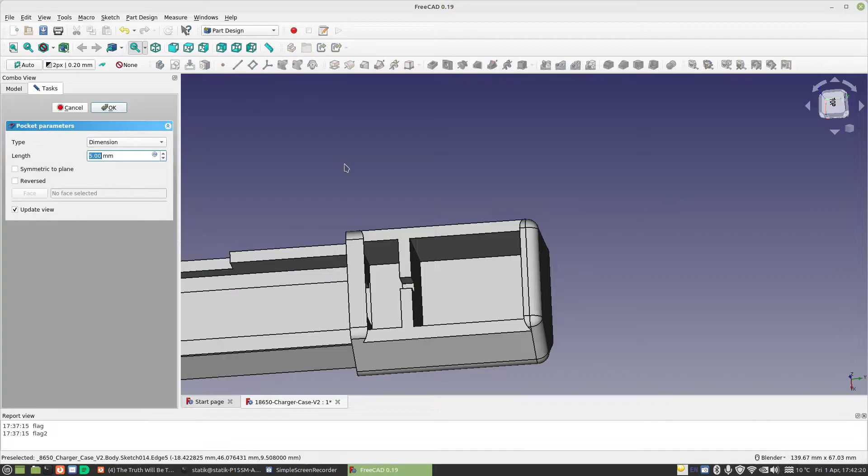And so we'll make a pocket now. Now, the pocket for that is going to be the cell height because we've already taken off the other width. So, spreadsheet cell diameter. Okay, and if we look, we can see that that is right at the same level as the rest of the bottom. So now we have a nice hole for the wires to come out.

Now we need a support for the charging circuit. So here's our charging circuit, and it's got this nice piece of foam on the top. So we'll use that to help hold it down. And it's got a clear area on either side here that we should be able to, yeah, that's weird. We should be able to put some supports in.

So I'll put supports in from here and from here, but we'll only put them halfway, I guess. And that'll leave space for that to sit in. Let's just measure this board height.

You'll notice I rely on my calipers quite a lot to do this. So, from the bottom of the board to the top of the foam is 13, roughly. Okay, so our cell height is 19, and that's 13. So we're going to make our little supports 6 high. We'll have to remember that. Actually, let's put that in the spreadsheet. We'll put our supports at 6 millimeters, and we'll make that board support height. Alright, so let's go back in here.

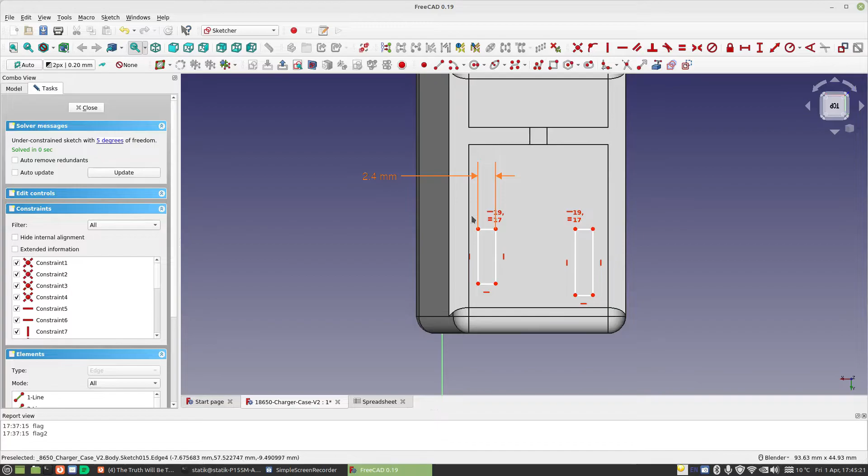And we want these to be the same distance apart. We want these to be the same length. And we're going to make this half the board length. Spreadsheet dot board length /2. Okay, so that gets them the right distance there, and then we can measure the distance from this outside point to this outside point and make that a cell diameter.

Now all we need to do is get them to sit in that corner. So we'll grab our handy dandy reference point. You can barely see that there's a point down in this corner. Click on it. See if I can click that and zoom in to get the point. And that point, we make them the same, and now we have a fully constrained sketch. Close. We'll pad that to a dimension of spreadsheet.board support height. There we go. So there's our board supports that the board should sit on.

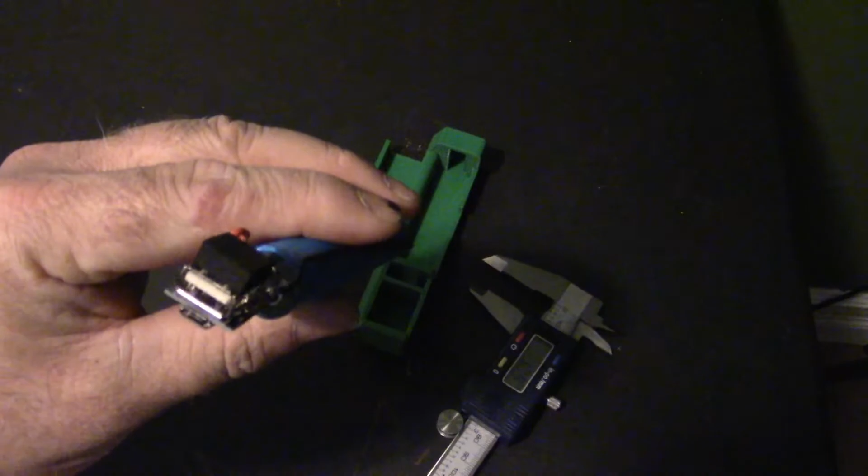Now we need our USB port. So if you look on here, you can see that we're going to need a space at least 9 from that bottom. So we need a 9 high, and then there's one below it. So let's actually just take the whole thing, and it's 11, so let's make it 12 total, or actually let's do it in pieces because we're going to make 2 different references. So it's 9 high there, and 3 high the other way. Alright, so to get that, let's draw our sketch on the outside.

Create a sketch. We're just going to use a nice box. Width. It is spreadsheet dot USB width. And we're going to use our bottom edge as a reference point. And we can use the same trick for centering again. Make these equal. So now it's centered.

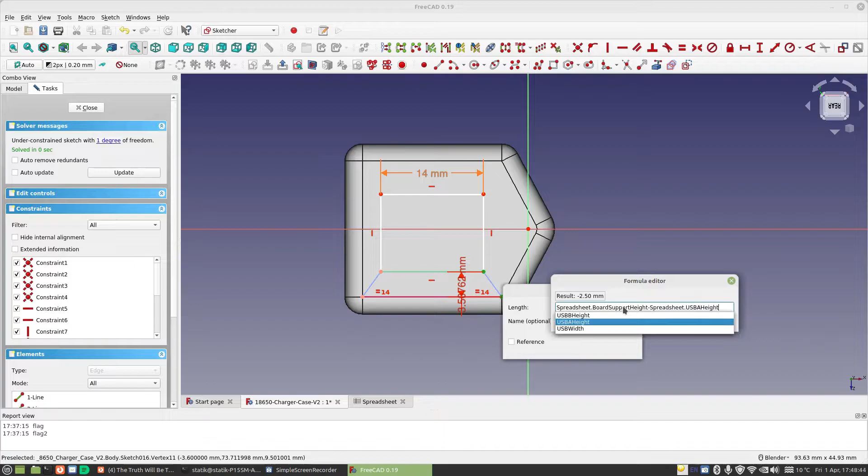Now for the height. We're going to make this height the board support height minus USB height. So that gives us a space on the bottom. And now for the height of the whole thing, let's do spreadsheet dot USB B height plus spreadsheet dot USB A height, and that gives us 12 and a half. So 12 and a half from bottom to top. Will that work? Let's see. Yeah, that'll definitely work. That'll give us enough space and space around for any other connectors.

I'm gonna close, and we'll create a nice little hole. Oh, okay, and you see what's happened here? Does this look like the same? Let's take a look here. Spreadsheet dot material thickness, because I don't think this. Okay, okay. Let's go back into our sketch here for a second. So we had this height pretty small here, but if we look, oh, it's upside down. So we used the wrong reference height. That's going to make it not work.

So we're going to go back into our sketch. We're going to change the reference. We're going to delete this, delete this, delete that. Leave all the other heights the same. And we'll choose this point as our reference. And add our centering lines.

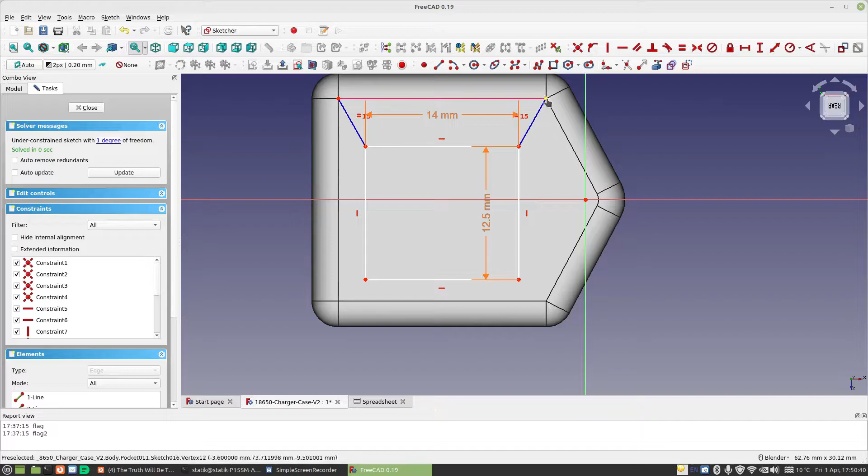And we'll do our math over on this height instead. Spreadsheet.board support height minus spreadsheet.USB B height. There. Now we can close that, and it's lower there. So that should give us a pretty good opening where we can put our charger in.

Alright, so we'll go back and look at our thing here, and you can see that it's a pretty tight hinge. There's a little bit of play in it. Other than that, I'm pretty happy with that design, so we'll print it again, and then when it's done, I'll show you how it actually comes off the board. It comes off the board like this, but it does have to be broken loose, so I'll show you how the next one gets broken out, and then we'll play with it. We'll put the circuit in and show you how it charges.

Here's our print off of the printer. As you can see, it's pretty solid. But to break it loose, we'll just take a knife and we'll put a little pressure right there. You hear a little crack, a little pressure in here. Try to get a little crack. There we go.

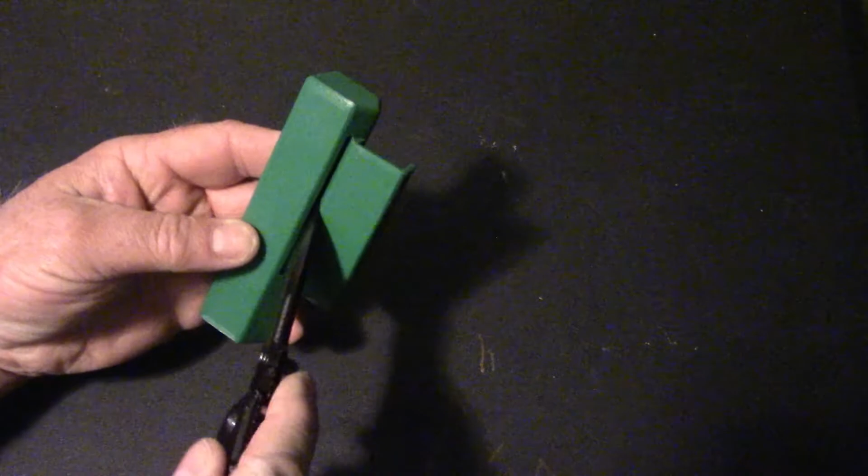Just about there. And it looks like we got a little bit of touch maybe in here, or maybe back here. So just put our knife in and loosen it up a bit. There we go. And we got a little bit of a seam here where it's touched, so we'll just run a knife along there. Take that little bit off.

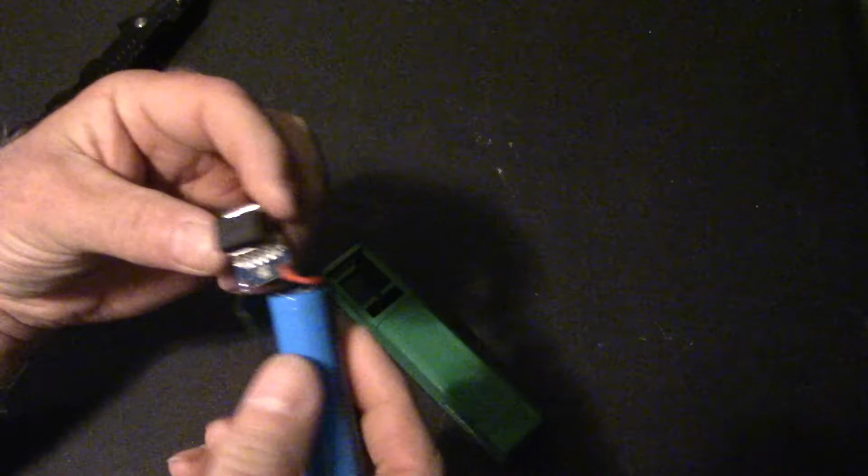And you can see just like that, we have a print in place with a very little movement, opening and closing case. So the next thing to do will be to take this circuit board, and you can see that that just barely fits in here. Right, so we'll take these wires, and because of where they're at, I left that space there. I'm probably going to solder on new ones through the holes down the bottom.

And these wires that are on it, you can see they're not going to be long enough, so we'll need some new wires. And we'll take some metal and fold it into our two springs. They're going to come out here and out here and be a little springy and hold the battery in when we go to charge it. But you can see a battery will fit in there nicely. Very little movement in it. So let's go find some metal.

Alright, so we're looking for a different metal, and I wanted to find one that was flexible enough to be springy, but at the same time we could bend. So I looked through all the different kinds of metal, and I found these tops for a can that seemed to be about the right thickness and springiness, and hopefully they won't corrode. And if we use my digital calipers here, we can see we have about 60 millimeters worth of flat space in diameter to work with. So let's jump into FreeCAD, and I'll show you another way that we can design something so we can figure out what we're going to cut out of these to make our metal pieces.

Alright, so here we are back in FreeCAD. Here's our model that we had built and printed, and now we need to make just a plan really of how we are going to cut that metal in order to have two pieces we can bend to make our tabs that are going to fit in here and fit in here. So if you remember, these are the height of a cell, and they are 8 millimeters wide, I believe. Let's look at our spreadsheet here. Tab length 8 millimeters. That's what we use there. So they're 8 millimeters wide.

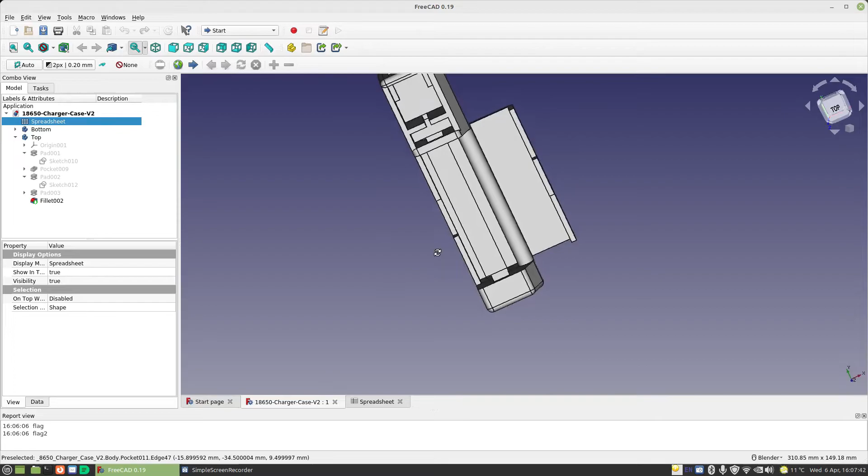This little space is a material thickness, which is 2.4 millimeters. And we also made this 8 millimeters in through here and in through here, and then we have a material thickness as well. So these are both the material thickness plus 8 millimeters, which will take us to 10.4. So what we need to do now is go into, let's see if I can do it from Sheet Metal Designer. Okay, no. So I need to start with part design and create a new body. And we will create a sketch from the top plane.

Alright, now before we get any further, I'm going to close that, and I'm going to go back to the model here, and I'm going to hide these so that we don't have to see them while we're working on our drawing. Alright, so we'll go back into our sketch. So if we start with the basics of our model, we're just going to do a square piece of metal. And I'm going to take out this one so I can center it like so.

And this is going to be the base, so it's going to be pretty much the length of the space where we are holding it. So that's the tab length. So we're going to make this spreadsheet.tab length.

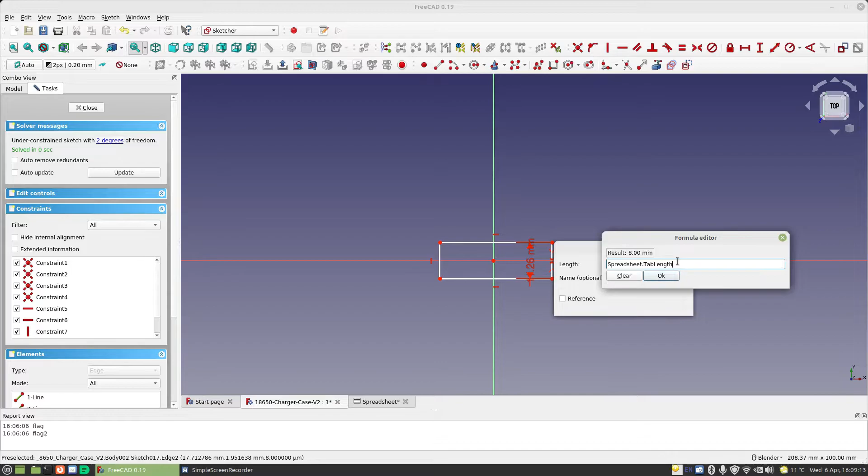Alright, so that is how deep it is. Like so. And then we need to make it wide enough. And I would like to be able to bend a piece of metal over top of the wire. So what I'm going to do is I'm going to make this spreadsheet.tab length plus spreadsheet.material thickness, which gives us the tab on the bottom, but then we're going to try and bend it up and around. So I'm just going to make it times 2. And that should give me enough that I can bend up and around.

So there's our piece of metal. And it says we have 1 degree of freedom because we didn't constrain it this way. So let's just center it. This one, this one, this one, and center. There we go.

Alright, and because we're dealing with very thin metal, the metal we have is extremely thin. So if I just measure it quickly with my calipers, it's 1/4 of a millimeter thick. So we're just going to make this 0.25. Alright. So there we have a very small piece of metal. Now how are we going to turn this into something?

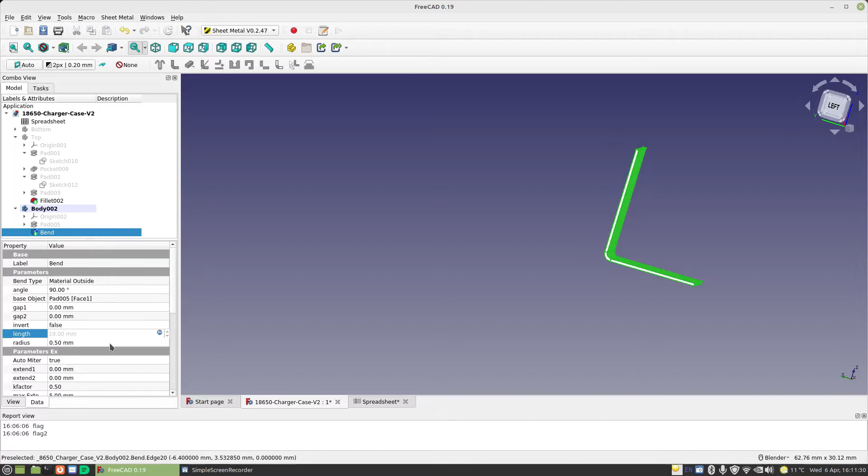And then the length of it should be the same as the cell height. So if I do Spreadsheet dot cell diameter, there. So there's our tab going that way. Is that what we want? No, it's not. So what we're going to do is go back to our sketch, and we're going to change this. We don't actually want to have the material thickness in there because we want to be able to bend it. So we'll take that out and hit OK, and hit OK, close that, and now you can see we have a nice square at the bottom, and this is the back part of our tab. Okay, and this is the inside piece.

And since we made this radius 0.5 millimeter, we should change this length by 0.5 millimeter as well, just for consistency. So let's go back into our sketch, and we'll change that. And we'll say minus 0.5 millimeters. There. Okay, so let's just take a look now.

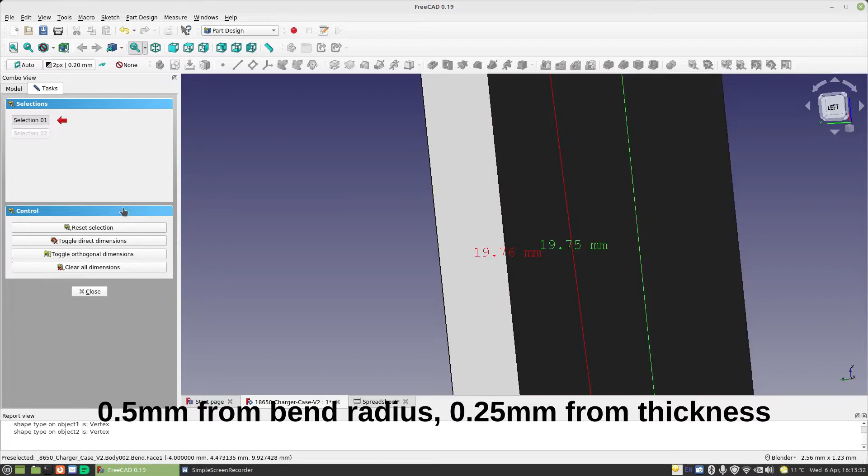If we go back to part design, one of our tools is this measuring tool. So let's measure from that point to that point. And you can see it gives me 2 different measurements. One is the straight angle over and down, and the other one is the angle. And what I want is this green one. So if I look at the green one, you can see it's 19.75 millimeters, which is 0.25 millimeter for our material thickness. But then we also have a little bit from the bend radius, so we need to change our length by 0.5.

So I hit close, and we go back into our bend, and we change this, and let's take off 0.5 millimeters because that's going to give us a little bit of extra working space, and then we can go back into these measurements and hit clear all dimensions, and now let's measure it again from that point to that point. Right, now we are at 19.25.

We actually want it to be 19. We actually want it to be even a little less. So let's clear that again. And we'll go in here. And we're going to subtract off a full millimeter. Like that. Okay. So there's that bend.

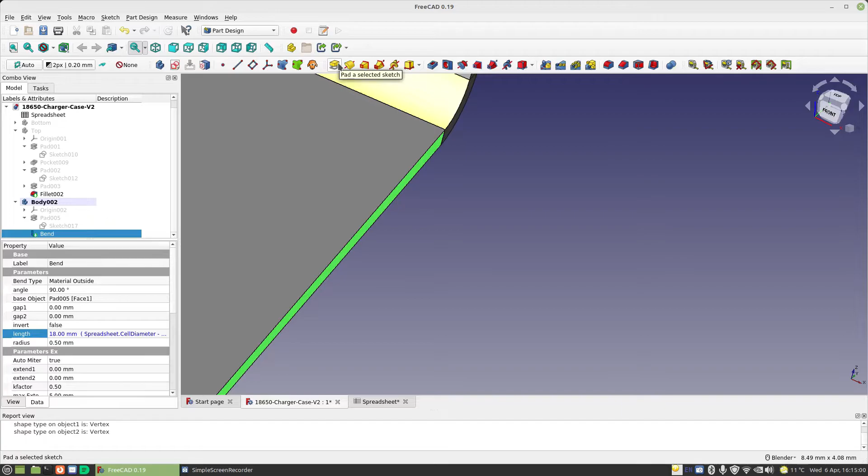Now, I said I want to be able to roll this up, so let's grab this face, and we're going to pad it out. And we're going to pad it out material thickness. And we're going to subtract off 1 millimeter, because that will deal with our corners.

So in here, we'll do the same thing. Go back to our sheet metal. And we'll make an angle. Change its dimensions here to the same thing: spreadsheet dot material thickness minus 1 millimeter. Alright. That's looking pretty good. And let's make this 180 degrees.

There. So that'll hold our wire when we solder it. Okay. And we should probably actually change this, because we're going to put a second bend at the top, so let's subtract off another millimeter. And hit OK.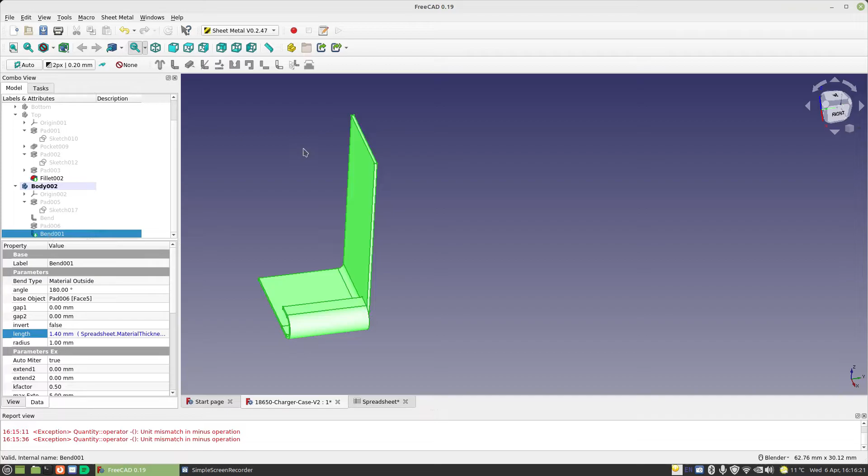Alright, we're still in sheet metal, so we're going to select this top edge and bend it 90 degrees. But this one is going to be spreadsheet dot tab length minus 2 millimeters. Okay, so that should fit in that hole nicely.

Right, and then now we need an angle coming out to make a nice... So we're going to bend that one down, but we're going to change the angle to, say, 75. And we're going to change the length to spreadsheet dot cell diameter /2 minus 2 millimeters. Like that.

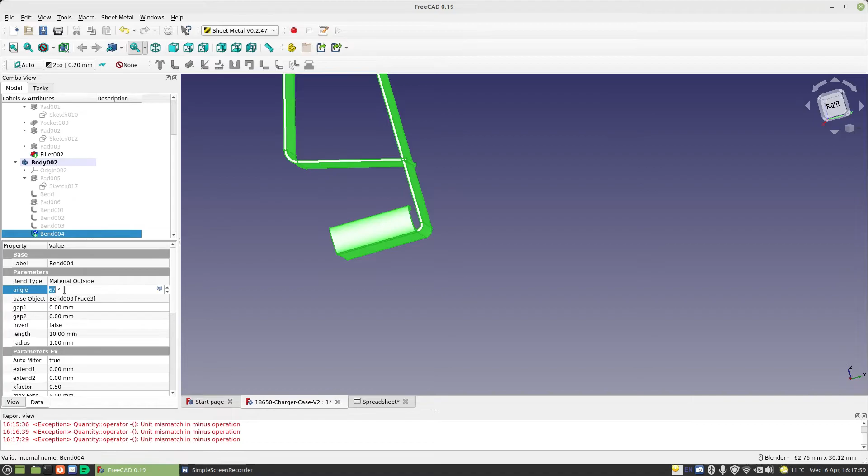And then we need one more bend. And again, let's change this angle. Let's say about 45. Oops. I guess I should probably make it a little different. Let's make this a 35, which will give us a flat face. No, it won't. 25, I guess. There we go. That gives us a horizontal.

Alright, so we want to change this angle a bit more. So let's go back to this one, and we'll make this down to 65. And we're going to make this a little smaller again, minus, let's say, 4 millimeters. So that's nice and shorter. And we'll change this bend and increase the angle to 25. Gives us a flat area for it to push onto.

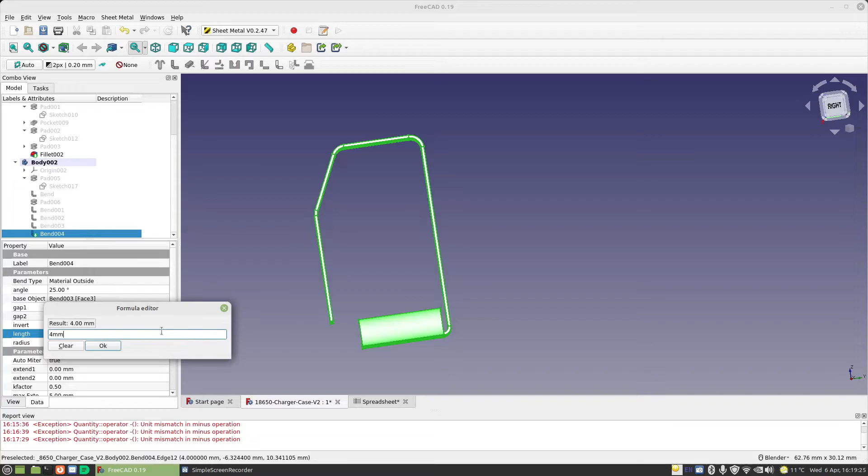And we'll make the length 4 millimeters. Like so. And then we need just a little bit to keep it from catching on the end. One more bend. Yeah, that looks about right. And that one's also going to be 4 millimeters. So if we build this, we should be able to put batteries in and out, and they should have good contact. So now I need a flat face.

There we go. There it is flattened. So here's my unfolded sketch. If I change the visibility here to false, there's our unfolded object. So what we need is 2 of those, and one's going to be the mirror image of the other. But because we're doing thin metal, we can just rotate it.

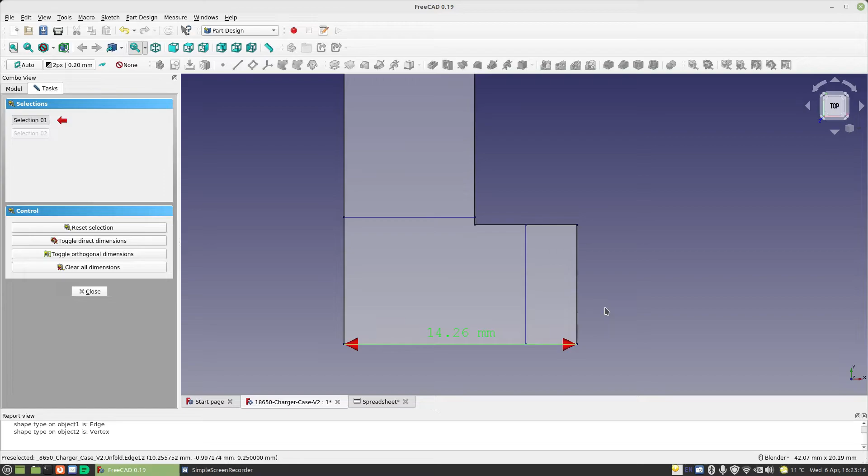So let's do some measurements. We go into part design. From here to there, 48.8, so we may as well call that 49. Let's just reset it. From this one to this one, that one is 14.26. So how are we going to fit that on our circle?

Let's close that. We're in our unfolded sketch. Let's do a new sketch on the XY plane, and we create a circle. We measured our clear space before at 60 millimeters, so we can constrain our diameter to 60. And we can set that and that to the same.

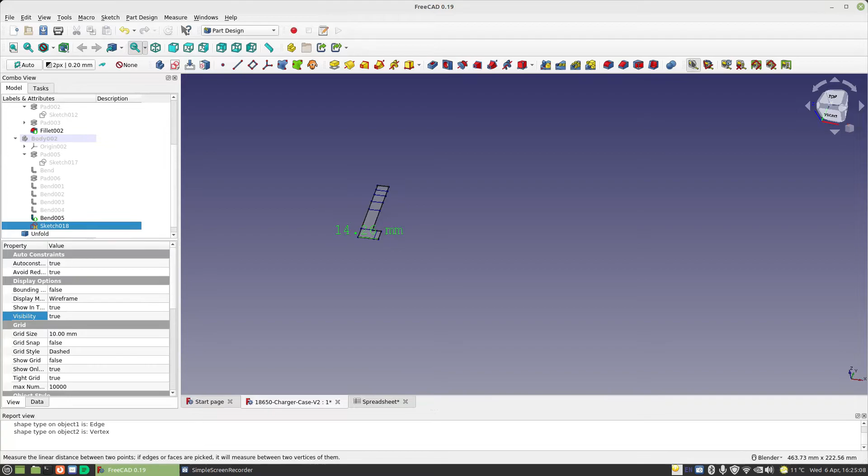And now, in order to fit these on, we have 14.26. So let's quickly draw a shape that's similar. Alright, so this one is 14.26. Back to our part design. I have to close this. Clear all dimensions. Let's measure from here to here. 7.5.

Okay. So this is 7.5. Close that. Go back to our measuring tool and measure from this one to this one. 6.26. So this one is 6.26. And now all we need is this top thing here. We'll close this, go back to our measurements, from there to there, 48.9. This one is 48.9.

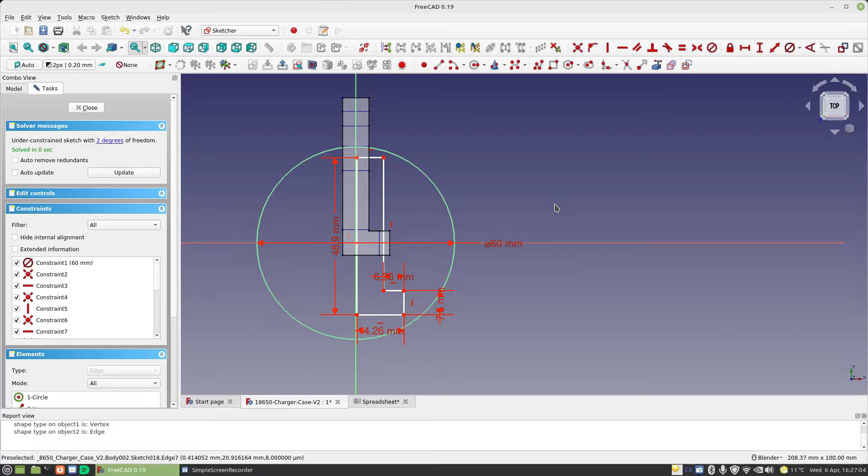Alright, so this will fit in there, which means that if this fits in, its opposite does. So we'll have to cut the thing in half, put one here and one there, and then we can fold that into our shape. So let's get cutting.

Alright, here we are in my garage. We're going to try and get this to work. Let me turn this. So you can see we have our plan here.

Noisy kids in our neighborhood, as you can hear.

Alright, so first thing we need to do is get a line down the middle of this. So I'm just going to guesstimate right about there.

And there's a line down roughly the middle. Now, across the bottom is 14.25. And we need these to be mirror image, so if I put both angles the same, that would be 28.5. So let's find a spot where we can get 28.5 across.

So we're going to measure here, 14.25 or so. Right there. And then 28 over here. There's our bottom line, and they're 8 millimeters across the top.

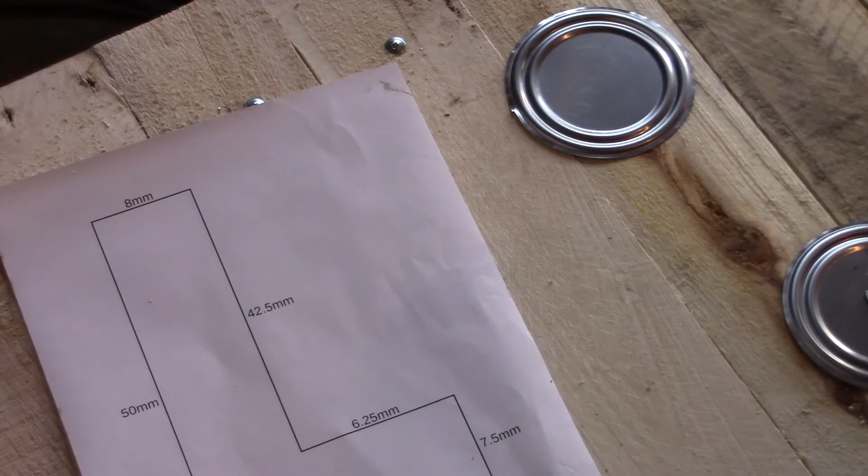So if I measure here, I'm going to use the 1 centimeter as my center. And I'm going to measure over 8 right there, 8 this way. Same thing down here, measure 8 and 8. So we can draw a line across those.

It doesn't have to be perfect because this is just for our charging, and it's 50 this way, so let's hope we've got 50. And we do. We'll measure from the 1, which means we're going to go up to the 6. So, from 1 up to the 6, just there. There's our top line.

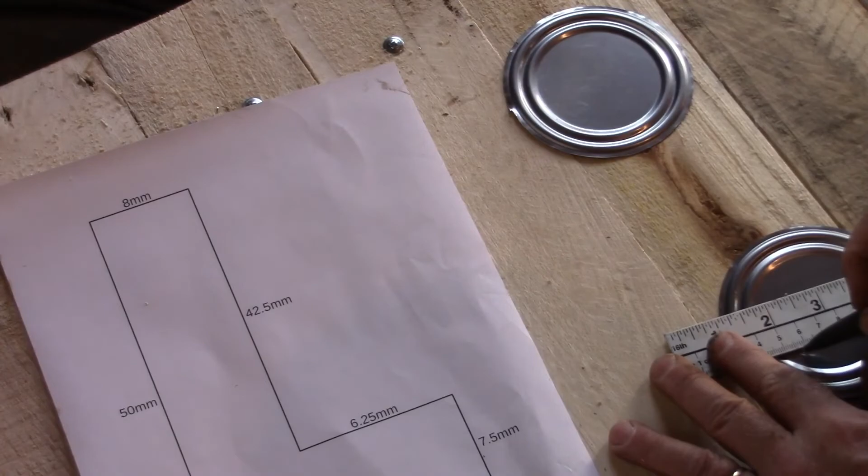Doesn't have to be perfectly square. I'll try - I can see that's not quite though. There, that's better, a little closer to square. 7.5 centimeters up - 7.5 millimeters, I should say. So that's 7.5 there, and 7.5 there.

Need to put our horizontals in there. So there you go to the center, 14.25, and draw that in. And 14.25 is right there. So there's our basic shape. We have to cut this out.

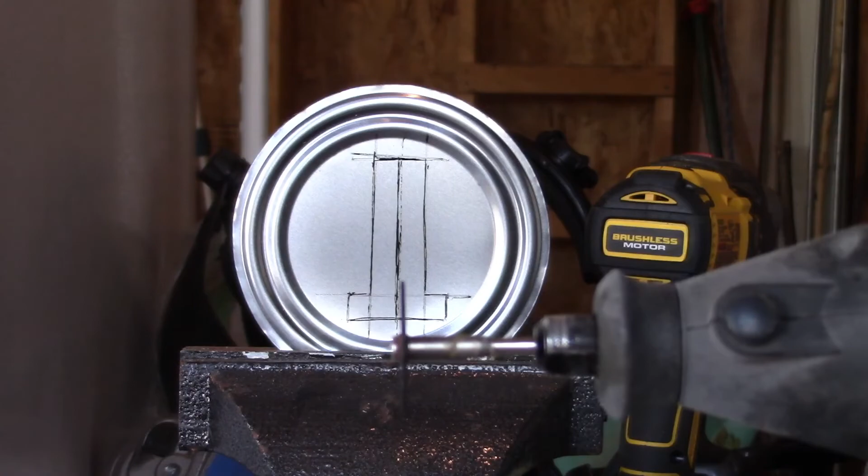This so they're roughly the same size. Alright, there we go. So we'll take that and we'll use the Dremel to cut it out. Alright, so we're set up with a Dremel cutting disc and we have our metal in the vise, so let's give her a cut.

That didn't work out - yellow handles for straight. Let's see if that works. Well, that gets us into there. Alright, let's try this one. There. Alright, that's one. Take that off there.

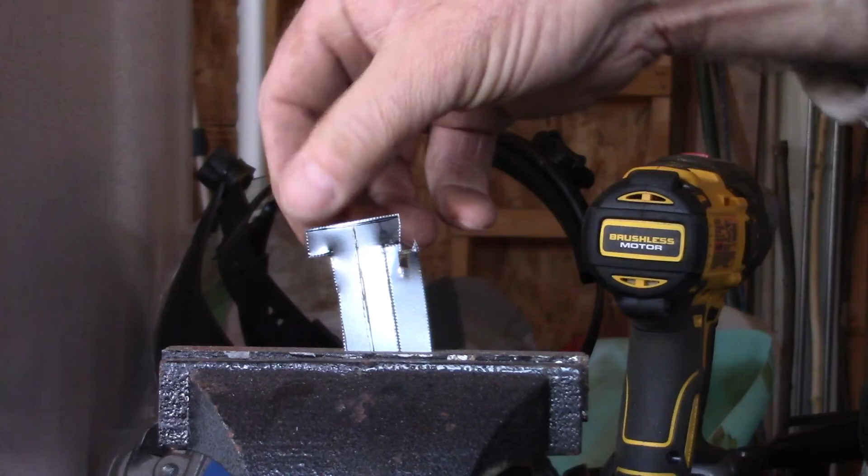Alright, let's turn this. Let's see if we can get this a little closer to what we want. Well, that's closer, let's take a little bit off this edge. I'll have to use a file on that after. Alright, so all we gotta do now is split this down the center. Which it doesn't seem to want to do. There we go.

It just wants to bend. Alright, so we'll use the Gerber and break that apart. Hopefully. There we go, so there is our basic metal. So we'll take the file and we'll clean those edges up a bit. And hopefully that's springy enough.

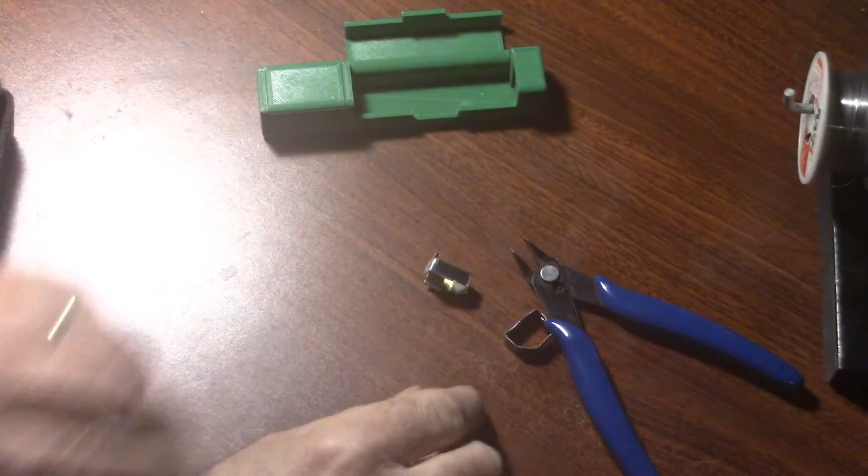Now I did end up making some modifications to it. I just had to use my little nippers from my 3D printer in order to cut them down to the right size. And we also planned for this little piece on the side to hold the wire. But I forgot with this end, that won't leave me an area for the wire to get by, and also it would get in the way of the two wires.

I also 3D printed this slide-on cover. I'll save you the pain of watching me design that, but as you can see, it lines up on both sides, slides in - it's all the same 0.2 millimeter gap. And we designed it with the slot in the center, but when we put our metal piece in, that will block that whole center thing, and we won't be able to get our wires through. So I just cut a V notch on either side. This one will be for the negative end and this side will be for the positive end. Because if we go back and look at our board, that's the side positive and negative are on.

Now we're out here in my garage, which is why we ended up with some condensation on the lens, because it's a bit cold and moist. But we're out here because that's where my soldering station is. So we're going to use this to desolder these two leads. And I'm going to use the wires off this JST connector because they should be the right length at least, and solder those on. And then we'll put them on the board and we'll give her a test after.